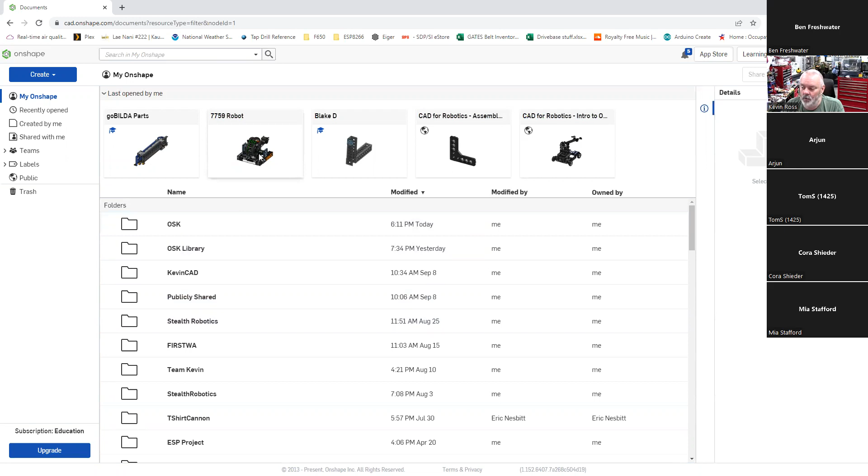I'm going to open up a robot. This is a robot that my team built a couple of years ago, and it's just a nice little robot to show you what is going on. Oh, and I guess I left it in a weird state, so let me load the actual robot.

The loveliness of this particular robot is that we built this—we started in September, did a full CAD model, and it took months because everybody was new to CAD and new to building things. But this was done in 2020, 2021, the year of COVID, so we couldn't meet in person. This was a great way for us all to learn how to do CAD, and my entire team got really good at CADing stuff. So this CAD model is very complete.

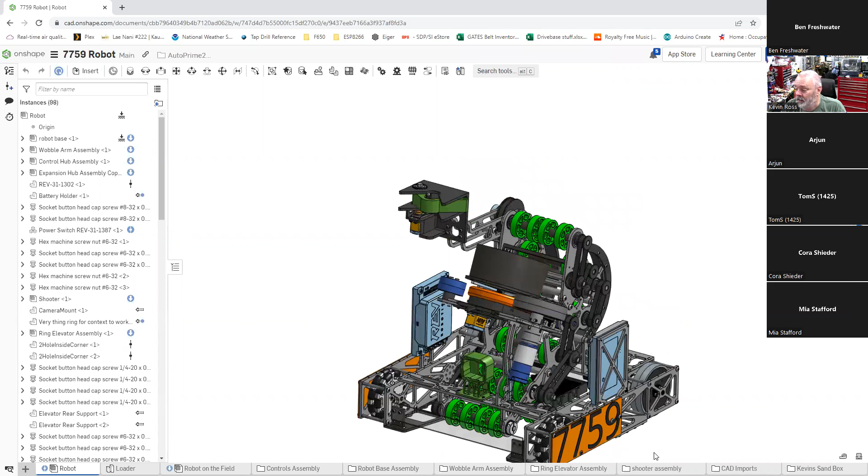It is. I can grab this arm and move it, right? So it operates, it's fully functional. The wheels can be turned and mechanisms can be exercised and moved up and down.

The nice thing is that as we were designing this robot, we were able to put it together and assemble it virtually because we couldn't meet in person. We started this project in September, but weren't allowed to meet until April 2nd of 2021, when the school district said we could meet with students. Everybody came to my house on April 2nd, and we had this robot assembled and working by April 4th, two days later. We got it programmed on April 5th, and we actually competed with it on April 6th, and it did quite nicely.

The beauty of having worked all this stuff out in CAD is all the measurements worked, all the dimensions worked. If I zoom in here, you can see it has 3D printed parts, machined parts done on a CNC machine, and purchased parts like these wheels and compliant wheels. The entire assembly was test fit and tried in advance, so we were able to manufacture this thing very quickly, and it worked out super well.

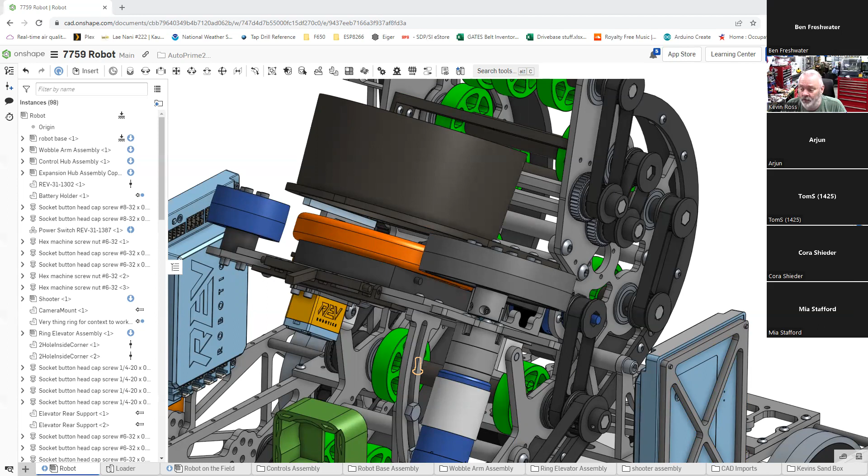So highly recommend this as a good set of skills for your team to develop. The salient points are, even if you're starting with a kit, if you ever plan on 3D printing any parts, having a good CAD model will allow you to make those parts and make them fit. So the key to good CAD stuff is trying to be as accurate and complete as you can.

So I'm going to rotate this part by holding down the right mouse button, and then pan it up a little bit by clicking the center wheel mouse button and moving it up. I'm just explaining that those mouse controls are important. You'll be running this program in a few minutes, so you'll get to try all that stuff.

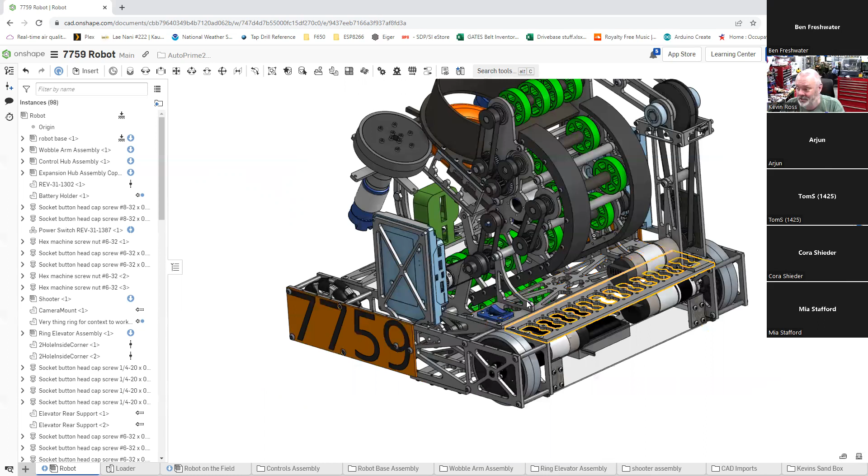My cardinal rule is that you must put in all of the screws and fasteners. You can see all the screws are in these parts. It's the single most important thing you can do with a CAD program, because oftentimes you'll find the tolerance between things needs to be careful, because otherwise this screw could be hitting this plate. It isn't in this model, but it actually was when we first started.

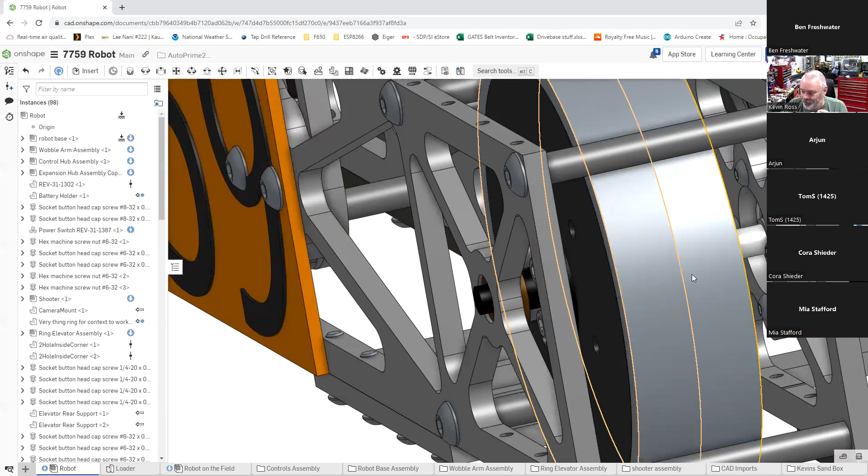You'll find there are places you have to take into consideration, like can I get at the screw? For example, this motor back here is actually assembled with a screw that's hiding behind this wheel. So this gave us the opportunity to make a design decision: in order to take the motor off, we have to take the whole rest of the robot apart. You get to find out things like that, and the biggest issues are when screws interfere with parts moving or sliding.

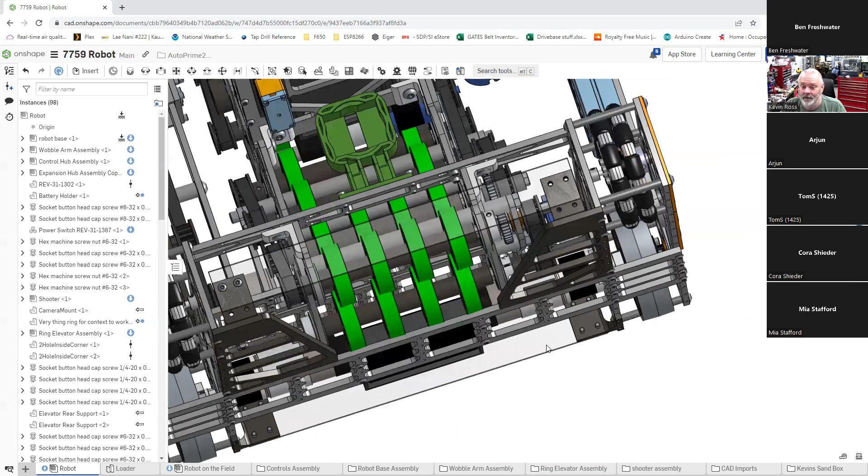Anyway, this is a really, really well done CAD model for a FIRST team. I've been doing this a long time, and this one's 100% complete. It has a black top hat thing instead, but everything is there - all of the screws, all of the parts. If we need to remanufacture something, it's easy - we just download the part and 3D print it or have it milled.

So that's the goal for you, to be able to come up with a good representation. The beauty is everybody working on this robot was working from a common plan. We were all building the same robot, and it made it go together and work really well. So that's sort of the gold standard there.

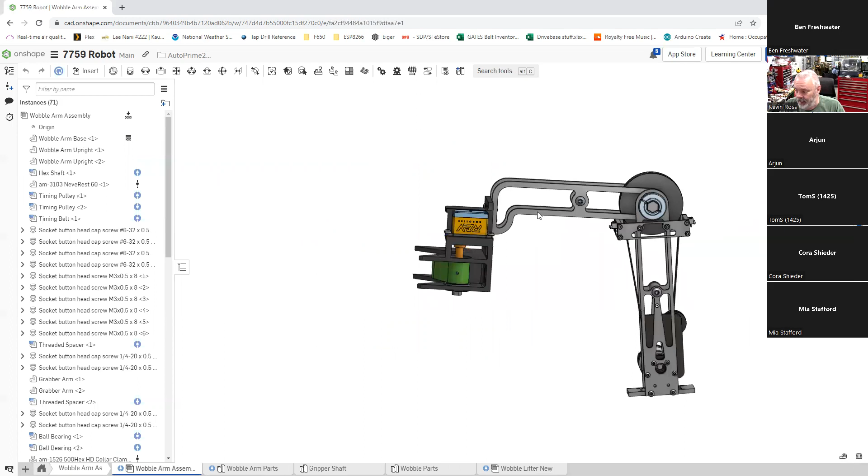Now, you're allowed to break things into sub-assemblies, which is really quite nice. For example, if I go over here and look at the wobble arm assembly, there's the arm that is on there. Again, these parts are all movable, so you can test their fit and stuff. And then we also have the ring elevator.

Where is it? There it is. So the whole thing that actually sucks the rings off the ground and slides them up through this mechanism, right?

We had students working on their submodules independently, and at some point we ended up assembling them all, and everything fits. Because you can try everything, and if something doesn't fit, we can have a little discussion about does the screw need to move, or what do we need to do. So there you go, that's what you're headed for, being able to do this.

Okay, are we good? Thumbs up if we're good. Mia, how'd you do? Were you able to get the account created? Almost, I had to switch to my phone, it was really complicated because the admin won't let me do Zoom on the computer. Roger that, we're working on it. It's all good.

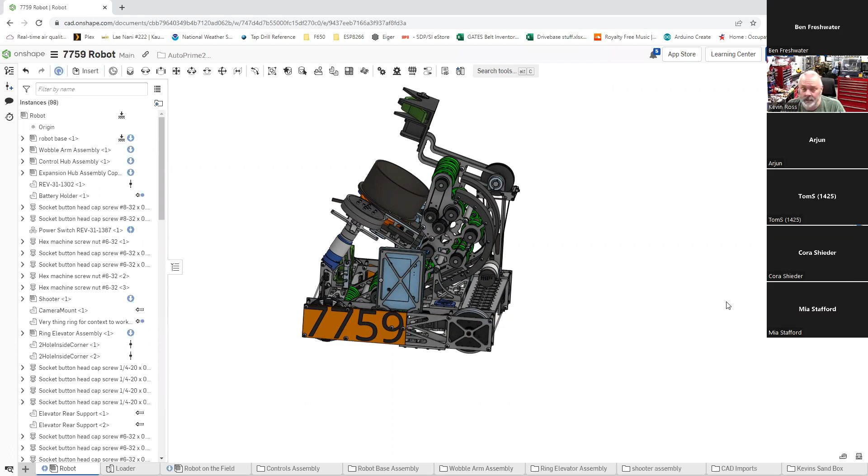Hey, so now what I'm going to do is show you a really cool thing. Somebody on your team, usually a mentor, does this, but I have to do this for all of you anyway.

Hey Mia, let me know when you - well, actually, never mind.

I'll keep going. So under my account, I can come over here and I can see all of the teams that I belong to. Here's all the teams that I belong to. And one of them, I'm the admin of, like this one right here, so I'm the admin of OSK. And here's a bunch of people that are in that, and all these folks were in the class last night.

So now I need to go and find the form. Actually, are you - let's see, hang on a sec, I got to log into this thing, I forgot to do that beforehand.

I apologize about that, I need Office 365, and I'm not going to say my password again. I did that on a meeting once. Yeah, it was only slightly embarrassing. It's all good.

There you go. So what I'm going to do is add all of you nice folks. We had 9 last night, so I should have - there it is, and 9, Blake was last night, so there's all of you guys - Sweet, Cora, Mia, Arjun. All right, good. So I'm just going to add all of you as members.

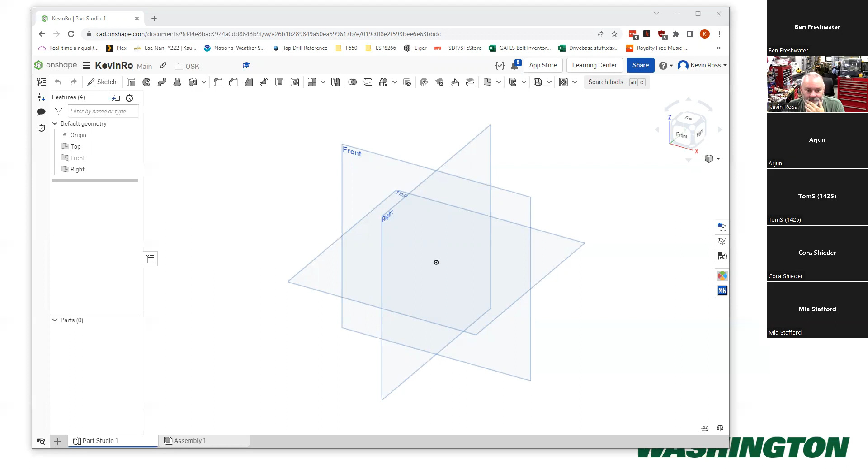Okay, so... all right, so...

What you're looking at here is the main interface to a document. Down at the bottom, there's a thing called a part studio and a thing called an assembly. Part studios are where you do drawing, drafting, and creating of parts. An assembly is where you assemble parts, either from things in your part studio or other documents in your realm, and there's also standard content. So assemble stuff, put it together, make it do stuff. Part studios are where you actually draw stuff. Those are really the two basic things.

I don't want to run off on Mia. Mia, how you doing there, pal? I'm trying to figure stuff out. Nice, I don't know for sure. Did you think you were able to log into Onshape? Yes, I think so. I see an OSK thing, and then Robbie S is there.

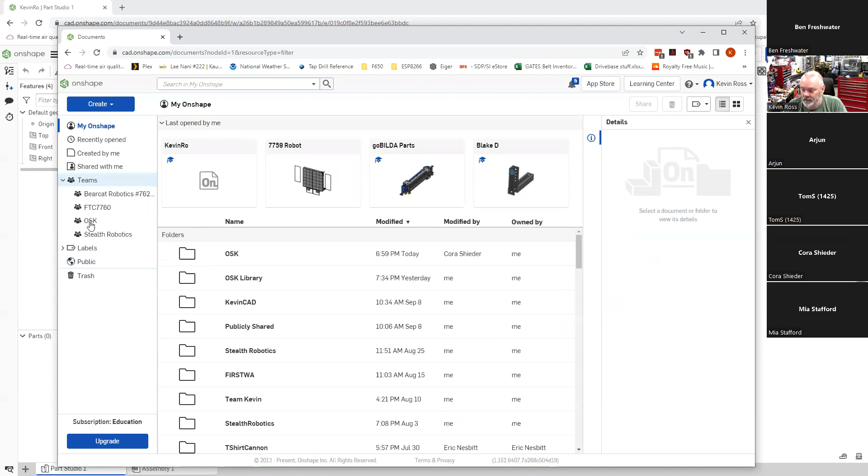Okay, and then I see Cora in the OSK thing, so I think I'm in the right place. So you are looking at, let's see, my Onshape, and if I go to my teams and click on OSK, you're seeing something that looks like this.

Yes. Okay, so I would like you to click on the OSK folder. Now you should have something that looks like this. All right, you're going to do a create document. Create up there, document, and just put in Mia S.

And then it's loading. All right, sounds good. I'll refresh this, and I'm assuming I'm going to see you up at the top. There you are. Okay, 1, 2, 3, 4, 5, 6. All right, everybody's here. I'm liking it.

Again, you can add things to this document. It can hold PDFs, Excel spreadsheets, and all kinds of stuff. There's a plus sign at the bottom that lets you create new part studios and assemblies. We won't deal with variable studios at the moment. You can create drawings and there's a bunch of other stuff the tutorials will teach you about. I'm not going to go too deep into any of that.

We're just going to play around with assemblies and part studios, starting with an assembly. In the part studio, you'll see up top it says sketch and extrude - that's on the top bar, and this all has to do with part studios, the tools used in them.

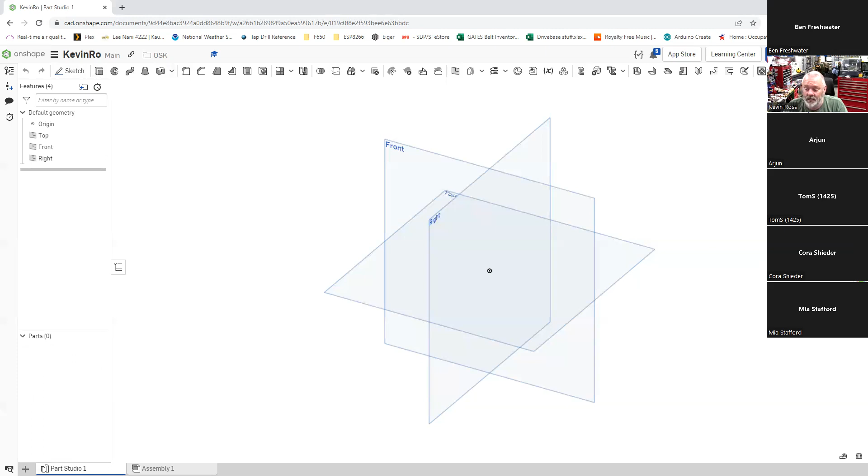Now I'm going to go down to the bottom and click on assembly. Watch that menu bar change up there - now it's got insert, a thing called a mate connector, and a bunch of things for working with assemblies. On the left-hand side, you can see it says instances, with assemblies and mates. Assembly one is this thing you're assembling, and you'll eventually list out a whole bunch of parts over here - a tree of all the parts you're going to do.

So we're going to get started right away and insert some parts. What I'd like you to do is, up in the upper left, find insert and click it. You'll get a little dialogue that looks like that. Go ahead and do that now.

Okay, so you see this little form - it's got current document, other documents, and standard content. Our current document says no part studios are available. Well, we haven't created anything yet, so our part studio is empty, nothing to insert.

What we're going to do though is go to other documents, and you should end up seeing something like this. Some of the stuff at the bottom is unique to my directory structure, but it'll say my Onshape, recently opened, created by me, that sort of thing. And you'll see it has...

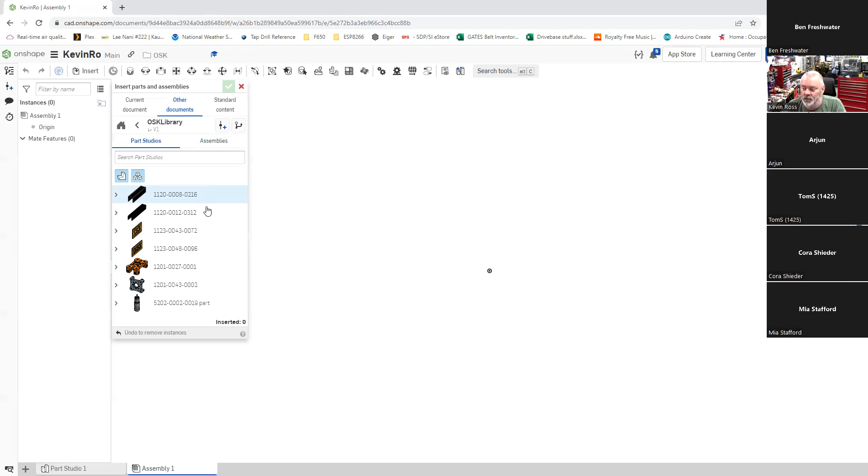So what we're going to do is add a couple of these box beams, these U channels. We're going to click on the one that says 216, like that. You can see that it popped up there, and I'm now using my mouse, and I'm going to set it somewhere and left click it, and that will insert it.

Now if I use my scroll wheel, I can zoom out just a little bit, and now go to the 312 part. We are going to insert one of the 312 parts. I'll put it right there. And then we're going to insert the 048-0096 part. We're going to take one of those and put it over here. So there, we just inserted 3 parts.

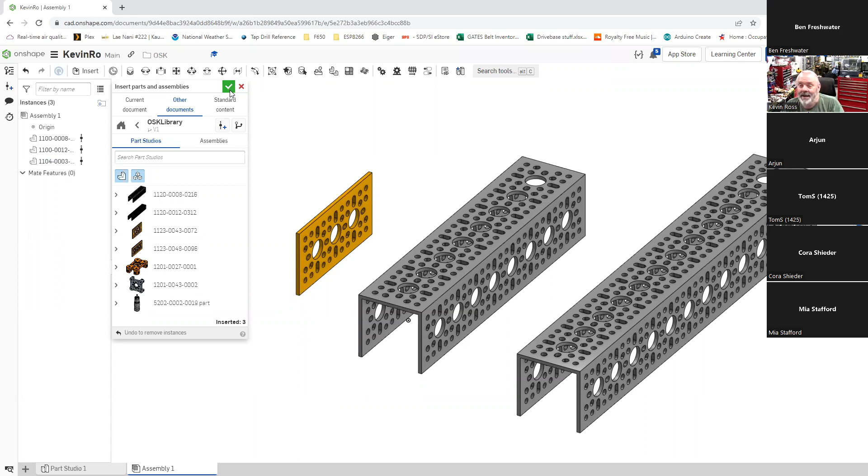Then I hit the green check mark on that thing, and you should have something that looks like this.

Anybody need help? Thumbs up if you're there. Ananya, you have just arrived. You've done some of this before. You might figure out where we're headed. I'm just listening in for now. Okay, sounds good.

Hey, team. So we've inserted our first 3 parts, and now we're going to play around with the mouse a little bit. So what I'd like you to do is, if you hold down your right mouse button and then start moving the mouse, you'll see that you can rotate all of these parts. It's basically rotating your view in space. That's the right mouse button.

Okay, cool, I'm going to let up on it. The center wheel, if I roll it, it will zoom in and it will zoom out. Try that.

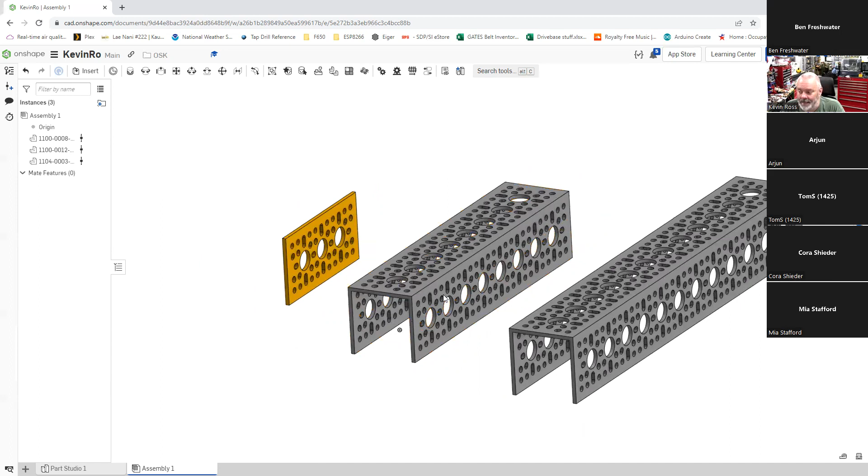If I hold down the scroll wheel and then move the mouse, I can pan everything. It'll keep the same rotation and zoom, but it'll just allow me to move things. So for example, if I was wanting to scroll in up here, I need to move that down a little bit, and I can scroll in like that, and I can move it over.

So that's me pressing that center scroll wheel. You're going to find that you'll get good motor memory on this: right rotates, scroll wheel zooms, holding down the scroll wheel allows you to move things around. Okay, everybody's good with that?

The left mouse button allows you to select things. So I am going to come up to this little plate up here, and I'm going to left click it. Okay, and you can see that fancy little control here, we'll talk about that here in just a sec. But if you look at my mouse, you can see that it has a little number 1 next to the mouse. It tells me I've selected one item.

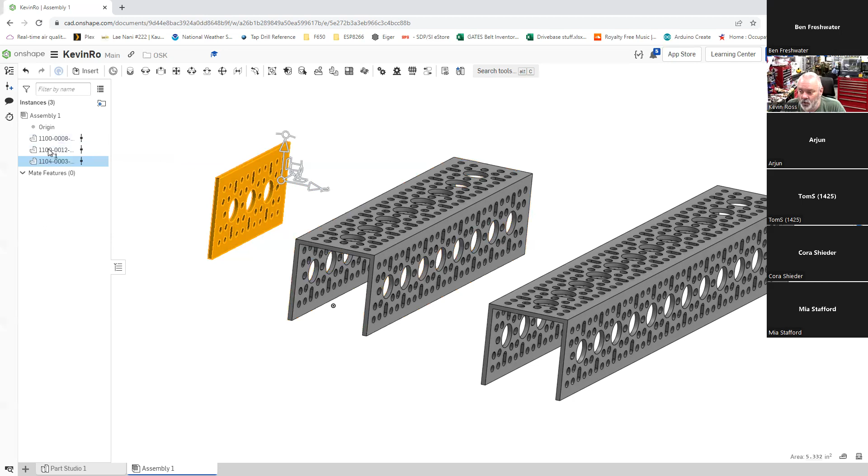Actually, it's highlighted the thing that I've inserted over in the instances tab, because now I'm going to go over here and focus on this left tab over here. You see these are the 3 parts that we've inserted. And it turns out that you can select multiple things over here. So now I've selected all 3 things.

They've all turned gold. If I want to unselect everything, then you go find a nice piece of white real estate on the screen and you just click on nothing, and they should deselect everything. Try that: select 3 things, come over here to white space, then hit the left mouse button and it'll unselect it. Okay, and so that's kind of the main things that you end up doing with the mouse: selecting things.

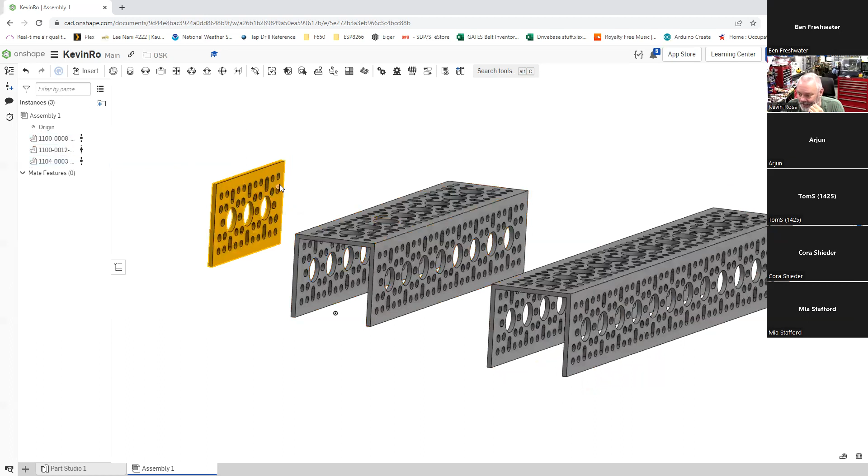Selecting things. There we go. And rotating, panning, zooming. Okay, now sometimes when you select something, you can actually hover over it and click the right mouse button once, and you'll get a context menu.

And these are things that you can do to it. So I'm not holding the mouse button down, I just clicked it once, and I can do this with all of these things.

For example, to make your life a little bit easier, let's have you click on nothing, so you deselect everything. And I want you to click once on the center part, this guy, or the short one. Right click it once, just click and let go, and click the fix word.

What fix is going to do is it's going to tell the program, don't let this part move for now. We can unfix it later. And you can see up here in the instances, it got a fixed label on it.

So what we're going to do, what I'd like to do is take this big part here and form an L shape, like we're building a robot base. One of the things I can do, you can see I've unclicked everything. I've clicked just on the long one, and we're going to mess around with this position control over here, where you can see the axes. I'm sorry, it doesn't let me zoom in on that.

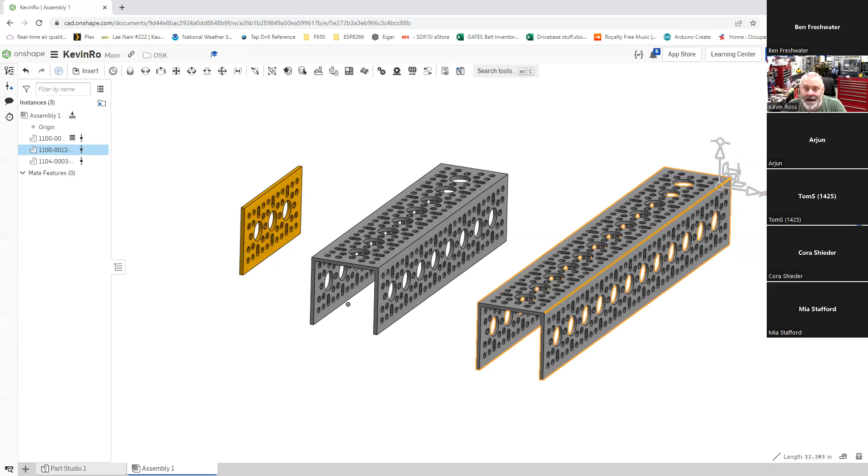Well, maybe if I hit Control plus, does it get bigger? It kind of gets bigger. That's a little bigger. It might be getting a little fuzzy because I over-zoomed my screen. You can see I have the ability to grab this arrow and I can slide the part, or offset the part, just in that direction.

I can select this guy, do the same thing in another direction. I can select this guy and grab that arrow and do it in that direction. And it's showing you how far I've moved it, and it's not really useful for us right now, the actual dimension. The other thing you can do is highlight this thing and grab one of the square boxes, and that will allow me to move it almost anywhere.

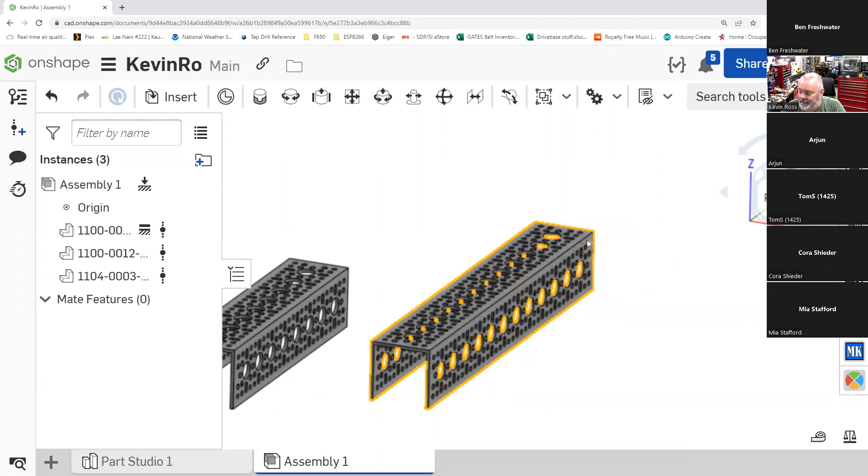So go ahead and try that. Try moving that thing around by just selecting it, and try dragging it around just a little bit. You don't need to drag it too far.

Okay, hopefully everybody got to do that. Another thing that exists is this viewing cube, and this will allow you to select views. There are three planes: top, front, and right, and those are standard planes. There's also left, back, and bottom. And it turns out if I turn this guy, keep going, you can see there's back, there's bottom. So it's a cube, and I can actually select planar views, views that line up with that, by just clicking that cube.

So there's a top view, and I can get the back view. I can turn it this way and get the left view. I'm using this thing to sort of click it, the front view, right? So what I really want is actually the top view. And so there's the top, so there I've got a top view. See if you can get a top view. Hopefully you can. Okay.

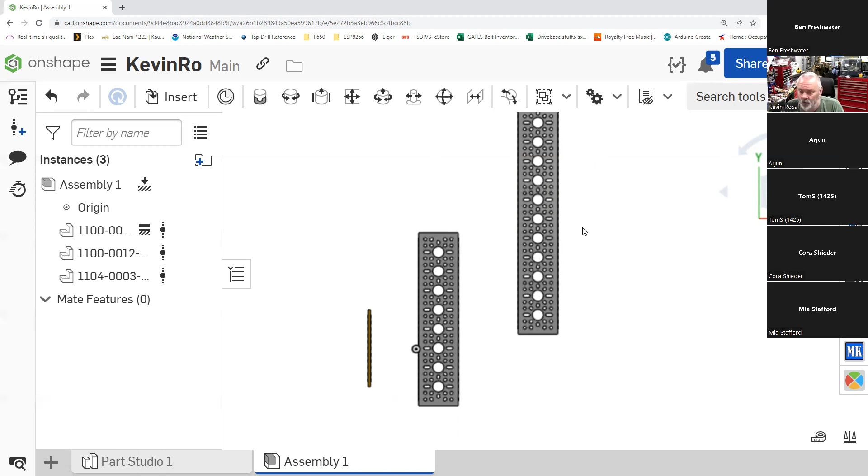And what I'm going to do is click off and unselect everything, and we're going to click on the big long part and see it gave us that movement control. This arc out here allows me to rotate things, and it'll tell me how far I'm rotating it. I want to rotate that guy 90 degrees.

And I've done that, and then I'm going to left click out in the middle and left click out in the middle, and there it rotated that part 90 degrees. And that's going to help me position my part. Try that. Everybody good? Everybody got that? Thumbs up on your reactions if you can.

How you doing, Cora? You got it? Yeah, I got it. My Zoom thing just went on full screen.

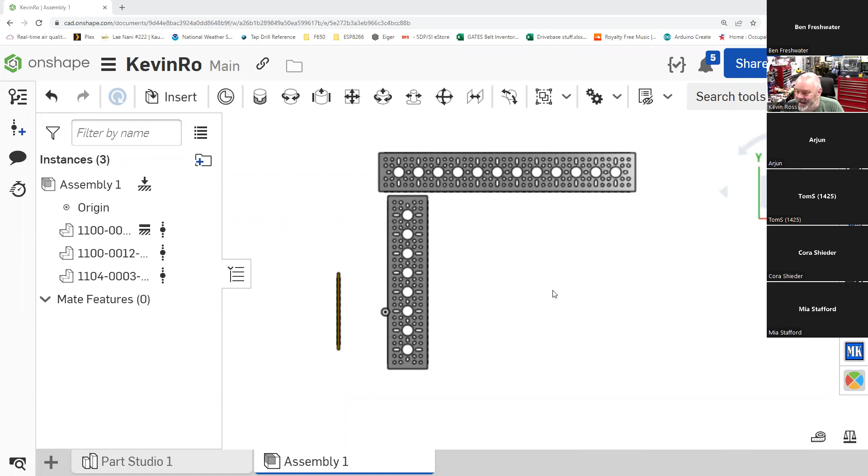No worries. Okay, so now I'm going to right click a little bit and see, I've unselected everything. I'm going to select just this plate over here, and I would like to rotate it. So I'm dragging with my right mouse button, even though that thing is there, and I would like to rotate around this axis 90 degrees.

Okay, and then I'm going to unselect everything. So there it stayed rotated, right? I'm going to look at it from the front, and I'm actually going to move this plate. I can just grab this plate and drag it up kind of like that. Try that.

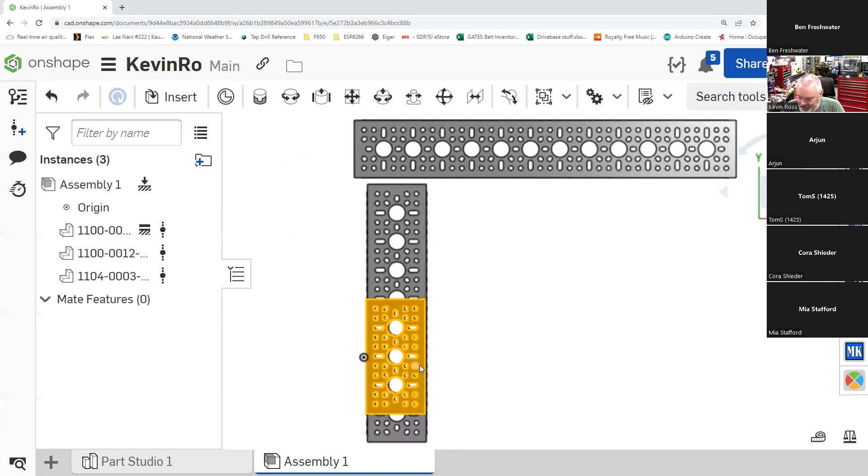All right, I'm going to roll it a bit and look at it from the top, and just take this part and drag it up here. You do this a lot as you're trying to get everything pre-positioned.

We're actually going to attach this plate to the bottom part down here, and then we're also going to attach it up here. So you can see that—that's me just rotating things around.

How are we doing? Everybody good? Thumbs up if you're good. Got something that sort of looks like this? All right.

Now what we want to do is assemble this thing, and so there are these assembly mates. In assembly, there's a bunch of mates up here, and they start from fastened mate, and they have a revolute mate and stuff.

If you just hover over one of these and let it sit for a second, it'll bring up and try to tell you what it's going to do. You can do a revolute mate, which fixes the two parts together and allows it to rotate around the z-axis.

If I look over here at the axes, the z-axis is the blue one. So if I rotate this a little bit, it'll allow this part to rotate around that axis. You'll see this in just a sec. There's a bunch of them up here, and you'll get to know these real well.

So what we're going to do is actually do a revolute mate. This mate here—I'm going to click that, and it'll bring up this little dialog box. All of the dialog boxes in Onshape put up a little blue thing, that's what you're currently filling in. So it's asking for connectors.

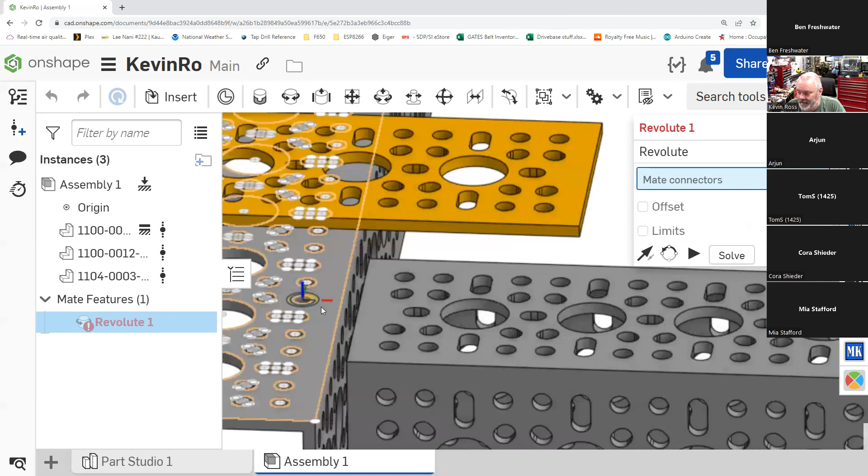So we're going to end up connecting this hole here. We want to connect this hole to this hole, okay?

So what I'm going to do is start by coming down here, and as I hover over this plate, you can see all of those little pucks, we'll call them. They're actually little connector indicators, and there's tons of them on here. You usually find them at corners, at vertices.

You oftentimes find them at midpoints. So there's a line here that forms that edge, and there's a midpoint out there. So there's a connector, and there's connectors here—you can see there's tons of them.

What I'm looking for is I'd like to connect this hole right here, okay? So as I hover over this and get close to this circle, you can see it's added a mate connector. It's inferring where we want it to be.

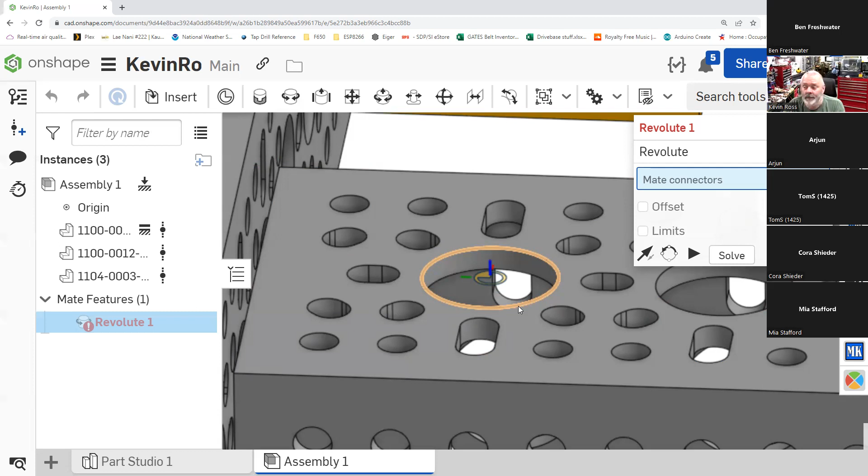If I'm hovering just over the edge of the circle, it's selected the center, and you can see the z-axis is pointing up—that's actually what we want. So if it looks like this, I can just click that, and you can see it added a mate connector on this part, and that's the connector we're using right there.

Everybody got that? I'm now going to zoom out a little bit, press my right mouse button and roll this thing so I have access to the bottom of this guy. I can zoom in a little bit, and you can see it's allowing me to select.

If I hover just over that circle, it's got another connector with the z-axis going the other way, which means that it's a mating connector.

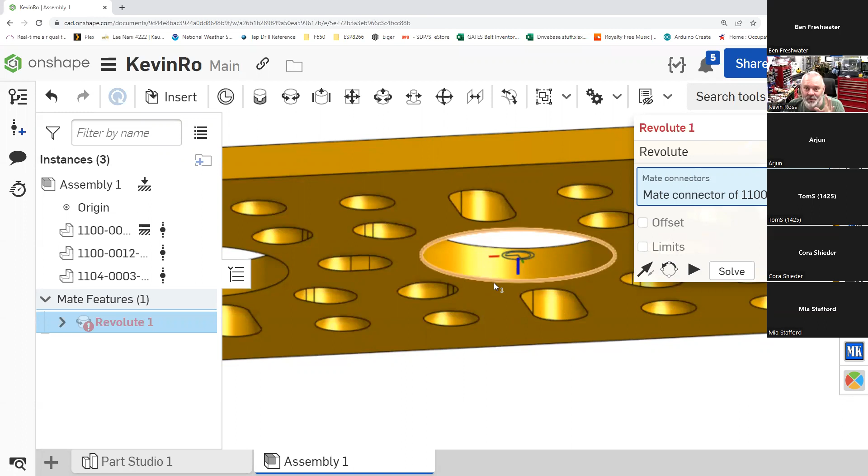Now, if you're having trouble actually getting that one thing, here's a trick for you. It turns out that almost all mates have three incarnations, especially when they're cylinders like this. I'm going to rotate mine just a little bit more so it's obvious.

If I hover over this, you can see that three mates have appeared—there's one, two, and three. See those three? They're all related to that same hole. So I could mate at the bottom of the hole, the middle of the hole, or the top of the hole, and there are useful reasons for doing that. Now, so what I did to make that happen is I hovered over the plate and got close, right?

I can hold down the shift key while hovering over the side of the hole, and it'll limit selection to just mates associated with that hole. If I lift up on it, that allows you to navigate around and find stuff.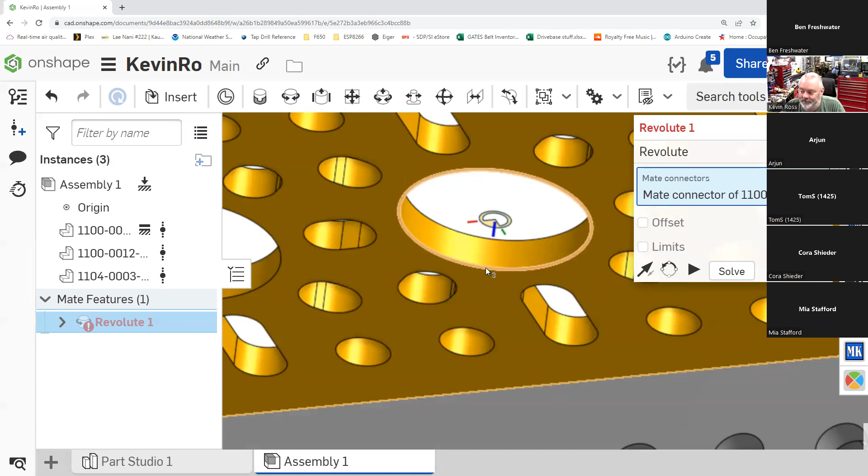So what we want is to highlight that mate right there. I'm going to click it, and my thing disappeared. Let me scroll out a little bit and rotate back up—you can see it moved the part into position for us, which is kind of what we want. I can hit the solve button, and it will position things where I wanted. Then I hit the green check mark, and now I have that mated connector.

You can see over here it says Revolute 1 is happy. Does everybody have a happy Revolute 1? Who needs help? Usually this doesn't go well for at least one person.

I have, like, when I revolved it, it went inside of the short piece and the long piece—it went all the way down into them. So you're telling me you have something that looks a little bit like this?

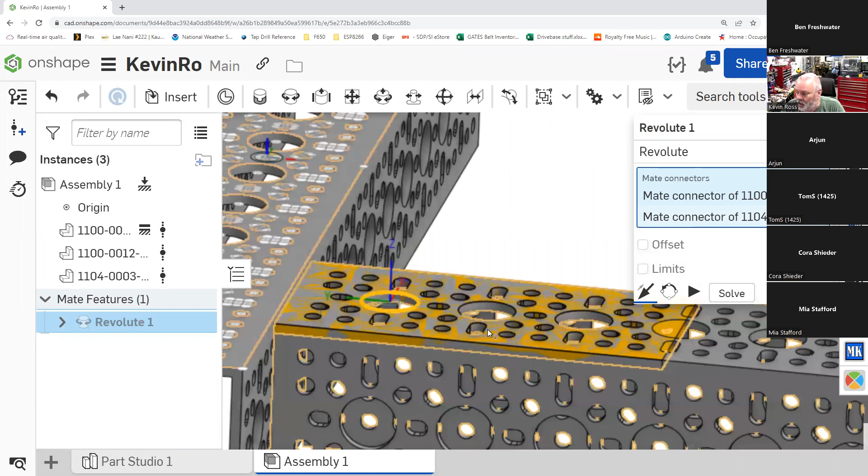Yes. Okay, so sometimes that happens. When it does, you can double click on that mate to reopen it and try hitting the flip primary axis button. That'll flip the axis, and usually that'll cause the part to go back up on top. Try that—did that work? Yes, it did. That's one of those things you get used to. Usually when something has buried itself into another part, you need to flip the axis. It's super common, no worries.

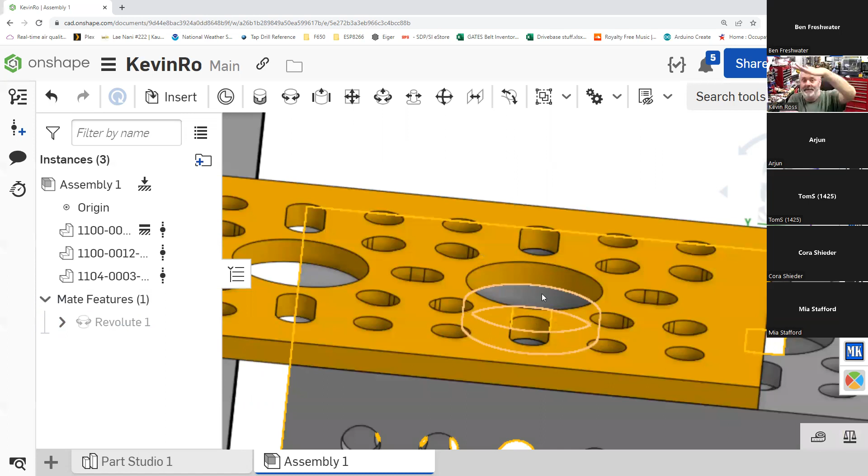So there you go—hit the green check mark, and you should have something that looks kind of like that. We just did a Revolute mate. That means it has taken the two pucks, those two mate connectors, and connected them together, but they will still revolve.

If I grab this plate—by the way, make sure the first part we inserted has the little fixed mark. If it doesn't, click on it, right click, and make sure it says fix. That little icon should be there. Then you'll find you can actually rotate this part because it's a Revolute mate.

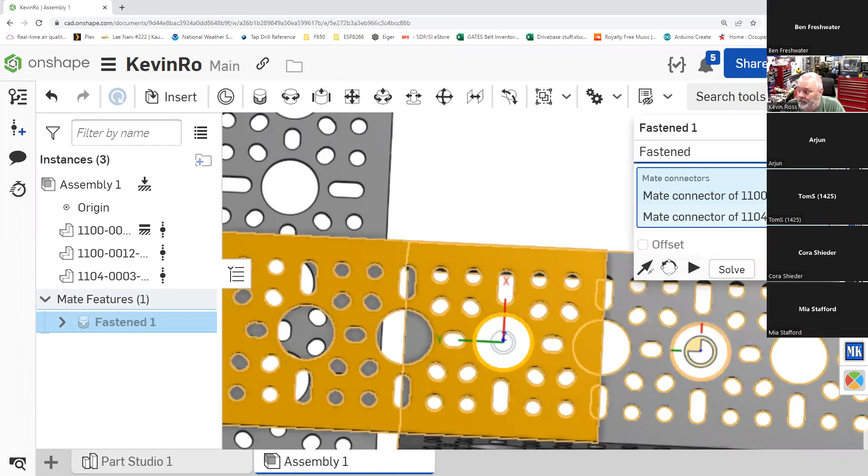Now you have some options here. If you want, you can decide that it all lined up really nicely, so I could edit this revolute mate and change the type of mate it is—there's a drop down here—and do a fastened mate instead. I'm going to do that, and I suggest you do it as well. Change your number one mate to fastened and hit OK.

Now you'll find that you are unable to move this thing. I can grab it and it won't move. It's fastened, it's fixed. Yay.

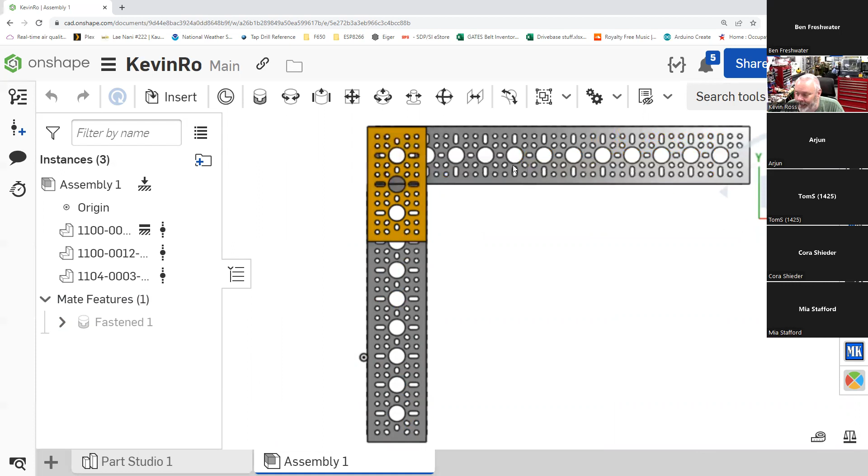Now what we want to do is get this part ideally lined up nice and perfect with that, right? So in theory we could do another fastened mate—pick this guy and the underside of this guy. All right, I want that one.

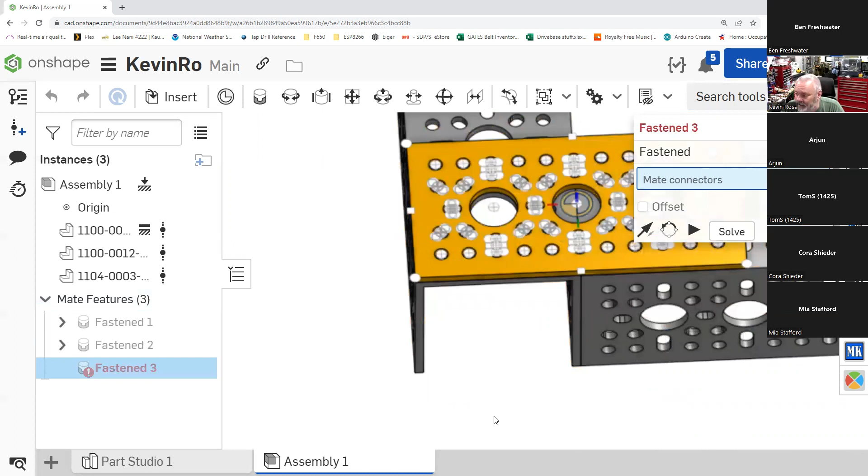I'm going to rotate this up, and you can see that if I hit the solve button, it will make sure everything moves into position. It looks right—all the holes are lining up. I should be able to hit the green check mark, and now I have a second fastened mate. I'm going to close that because I'm done with fastens at the moment.

So you can see we just did our first assembly. You have half a robot base going here—not bad. These are the sorts of skills you're going to get really good at when you do these tutorials, but I just wanted to give you a sense of what it is you're going to be learning when you do all this tutorial stuff.

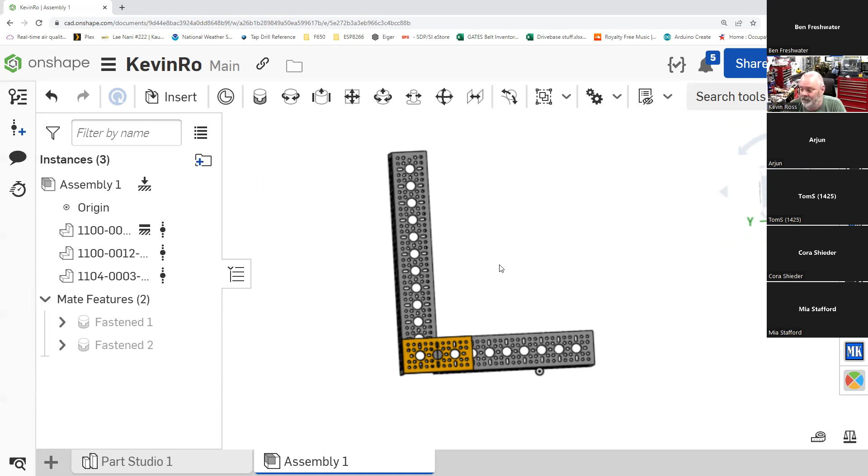So these are now fastened, they don't move. We're going to try inserting a couple more things. Wouldn't it be nice to actually bolt this together? This has a ton of bolt holes, but I think if we were to put like 4 screws, one here and here at the end, and one here and here, that would probably hold it quite nicely. Actually, we're going to put screws on this side as well, so we're about to insert 8 screws. I'm going to unzoom a little bit so it looks cleaner. There we go. All right, we're going to do another insert.

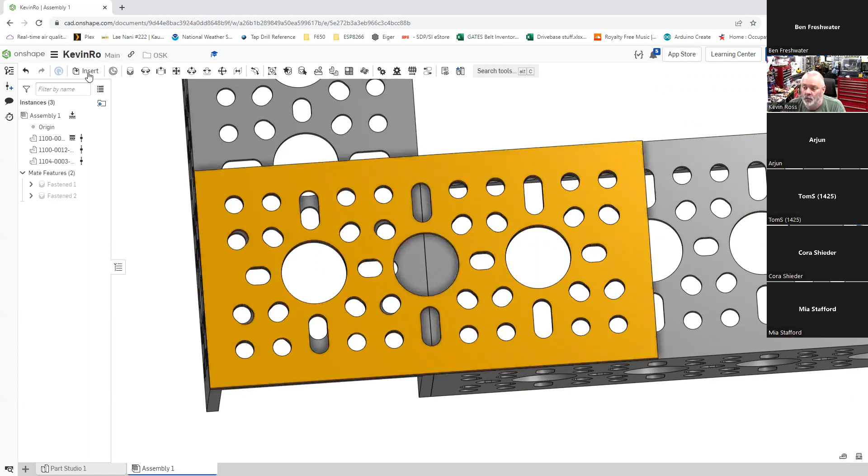Everybody's looking good. All right, so we're going to do an insert, and instead of other documents, we're going to go to something called shared content and standard content. This is where you find nuts and bolts and screws. They have a very limited set of things. This is a little form that you fill out, and it's going to remember stuff. It's smart and tries to remember what it is that you use commonly. But we're going to start at the top, so you kind of fill this form out from the top to the bottom.

So we can either use ANSI inch—like this is a 1/4 inch bolt—but turns out that the parts we're using are actually metric, so we're going to select ISO, International Standards Organization, which is equivalent to saying metric. We can select bolts and screws, nuts, and a bunch of other stuff. We're going to go with bolts and screws for now. We would like to use what are called socket head screws. And we can actually select socket head shoulder screw. Oh, I apologize, hex socket head cap screw is what I meant to say. There we go, hex socket head cap screw.

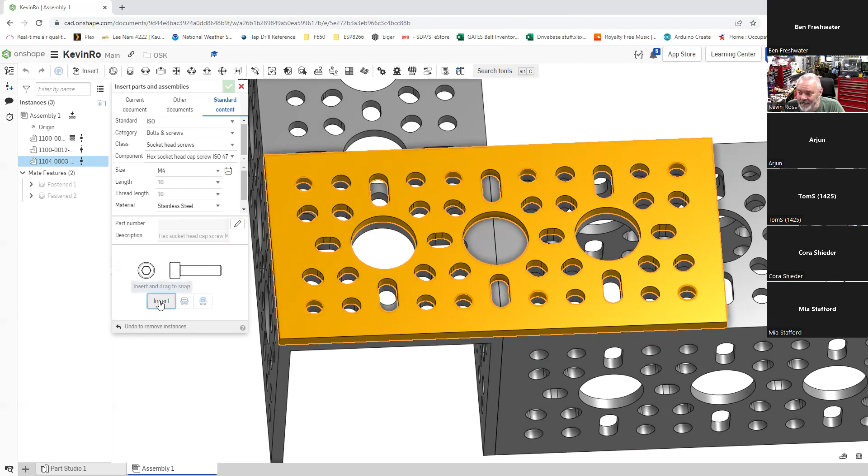And I'm actually going to do this hole, and I'm going to do the 4 outer holes again, and suddenly I've got 5+, all right? So I've selected all those holes, and all I have to do is hit insert, and it is going to drop all of those screws, and it's automatically mating them to those holes. It's super slick, it makes me happy, I tear up a little every time I do this. The other programs make you do each one individually.

All right, so if I roll this under—I'm using my right mouse button still—I can see that the screws are sticking through. You'll notice they didn't put the threads on here. It turns out that the way Onshape works, threads are very computationally intense and they really slow things down, so they tend not to use the threads.

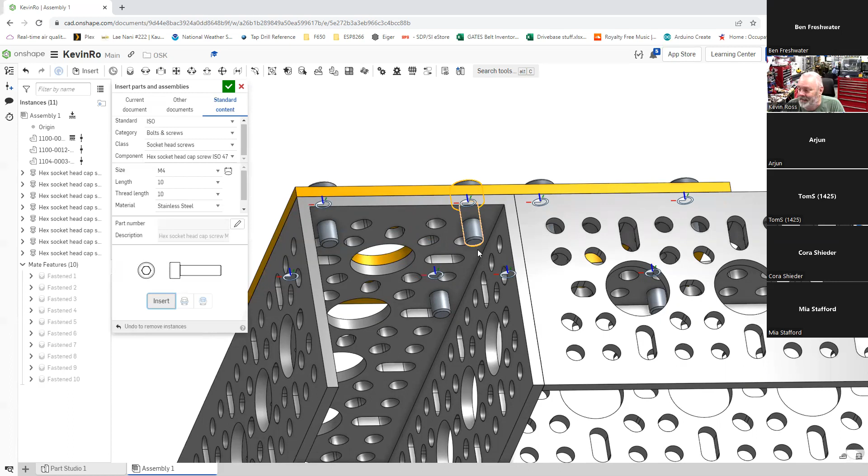It's fine. So now what we're going to do is, well, we need nuts on this side, don't we? So I can go back over to ISO and say nuts. We could use hex nuts, but we're actually going to use prevailing torque hex nuts. Their shape is very similar to what's called a nylock, so we're going to go with it. Then you're going to use the component, which is a prevailing torque thin nut. All right, I'm going to pause there for a sec so everybody can catch up.

Once again, we're going to select all of the places that we want nuts. Where we actually want the nut is for it to adjoin the hole, not the screw, because that's where the screw goes through and tightens down. So I'm going to come to the bottom side, select that circle, come over here and select that circle, and do that to all of these.

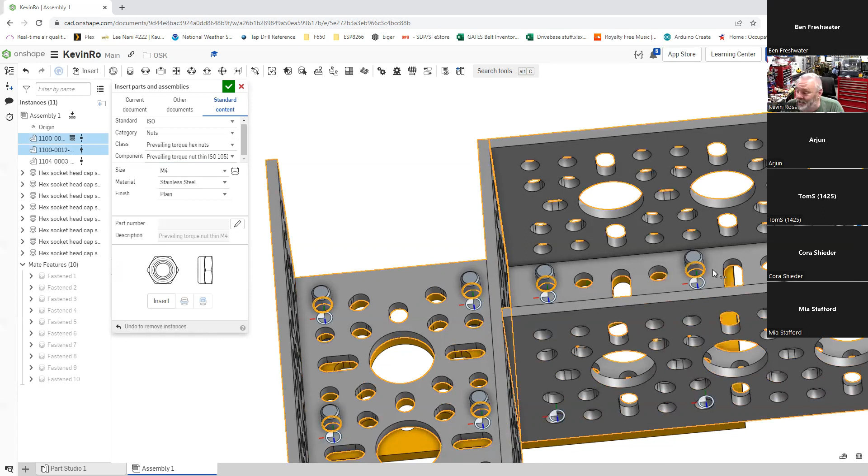And there's those two. Again, you end up using that right mouse button a lot, because you can just hold it down and scroll things around so you can get access to it.

All right, so I went and selected all the places where those guys line up, and then I'm going to hit the insert button, and I'll get all of my lock nuts.

Lovely. Best thing ever.

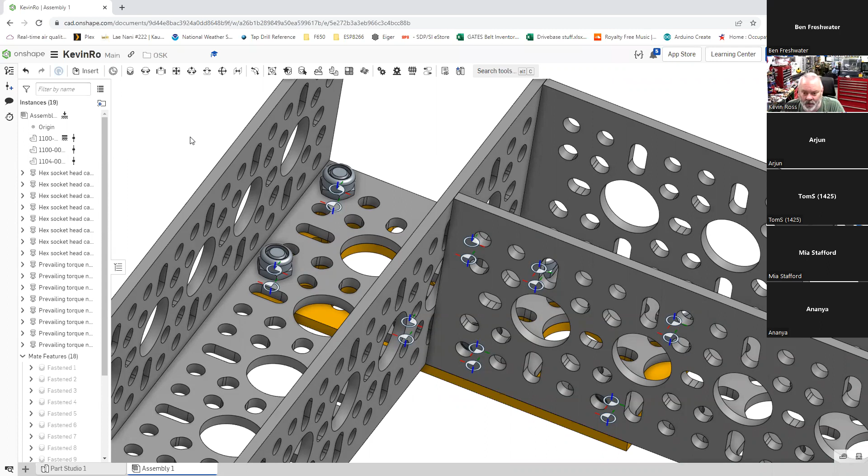Is it okay if I just kind of follow along? Because I can't really watch and do at the same time, so I'll just kind of get a feel. Okay, sounds great. I'll be showing you the tutorials you're going to do, we'll end up going through all this again, I just wanted to give you a feel for what it looked like. Whoops, we lost Cora. Oh, that's all right, she told me she was going to have to leave early, she has to go feed animals.

All right, hey team, we just assembled something. If we scroll out, there it is, that's like half a robot base. That's what it's like to assemble stuff. And it turns out these are all parts out of the goBILDA kit, you'll find that you can download parts from most vendors. I'll show you that in just a sec.

Okay, we're going to just, okay, hopefully everybody is there, and I'm going to show you one other trick, which is up here next to your file name is a little menu thing. If you click down on that, you can set a whole bunch of things like the document properties, there's a bunch of stuff you can do. One of them, though, the important one, is workspace units. If you click on that, this would allow you to change from inches to millimeters, and you can just swap back and forth depending on what you're doing. It turns out that the parts we're using here are metric, so I've just switched this over to millimeters for now. Go ahead and do that and hit the green check mark.

So it was the document menu, workspace units, select millimeters. Okay, thumbs up when you're done. Good.

Tom's got it, Ben's got it. How you doing, Arjun?

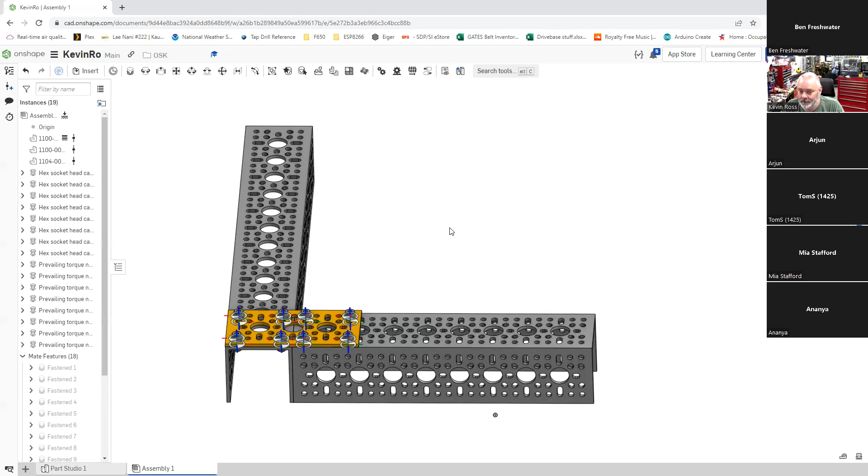All right, so I'm thinking, hey, let's go measure a few things down here. We're going to build a little plate that's going to attach right here, and so we'll go one, two, three, four, so we're gonna do those.

So what I'd like to do is, well first of all, I can scroll in on this thing. So I've scrolled way in, and I can actually come with nothing selected, I can come select this hole. And one of the things you might notice is down here in the far right-hand corner, it's telling me what the diameter of that hole is. That's pretty useful. And actually there's a little measuring tape thing here, and you can turn that on and it'll show you what it measured. It measured diameter and it's telling you the coordinates of it. Ooh, that might be interesting.

The other thing I can do is, I've got that one selected, I can come over here and see that the measurement changed. It's telling me the distance, and there it is, center distance, and it's highlighting that line right there. So those two holes are 32 millimeters apart. Okay, and I think I should be able to click off this. Okay, so I unselected everything. I'm going to click this hole and the hole up here at the top, and it's also 32 millimeters. So it's a 32 millimeter square.

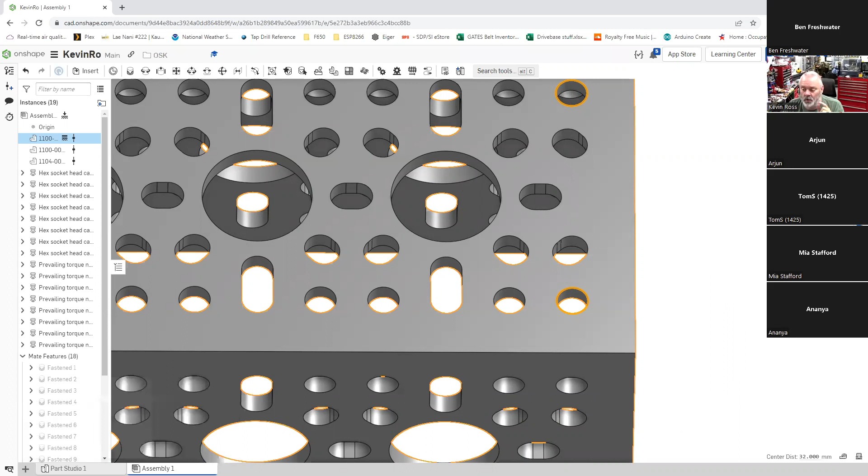Go team, we're going to go make a part. So I'll close this little measuring thing, and I'm going to come over here to Part Studio 1. So I'm going to click off the assembly and we're going to go to Part Studio, and it'll end up looking like this. Okay.

And we're going to start a sketch. So I'm going to draw a sketch, and I'm just going to click on sketch up here. It's underneath the file name. And if you check, it's asking you to please select a sketch plane.

There are 3 defined planes when you first start a sketch: top, front, and right. So there's sort of the 3 dimensions here, you can see them there. And we'd like to use the top plane, so I could click on top here, or click on top over here. Here are the planes, by the way. I'll just click on top over here, and you can see it, the sketch plane is now the top plane.

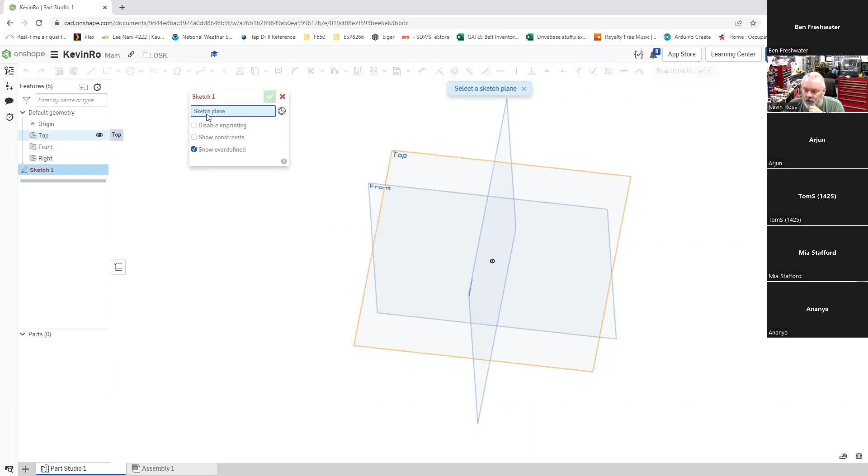That's handy. And if I want to look at it in plan view, I can go over to our orientation cube and click on top. And now I'm looking straight down on it like it's a piece of paper. Okay, awesome. You'll notice that the menu bar up here has changed.

There's some drawing stuff. I can draw lines, rectangles, circles, and you can go right down the list. There's a bunch of other stuff. We're going to touch on a little bit of all of these.

Okay, we're going to draw a rectangle, but a center point rectangle. This one is currently called a corner point rectangle, but if I click on the down arrow, you can see there are other rectangles we can draw. We're going to do a center point rectangle, so you should get that little icon right there.

Now I'm going to go over and see the dot in the middle of this thing. That is the origin, and I'm going to use that as my starting point. So when it highlights, I'm going to click it once with the left mouse button, and then move this out. You don't have to drag, I don't think, you might be able to, but I didn't. I'll come out here, and then click one more time. So I left clicked once, and you can see now there's a number down below, 50.523.

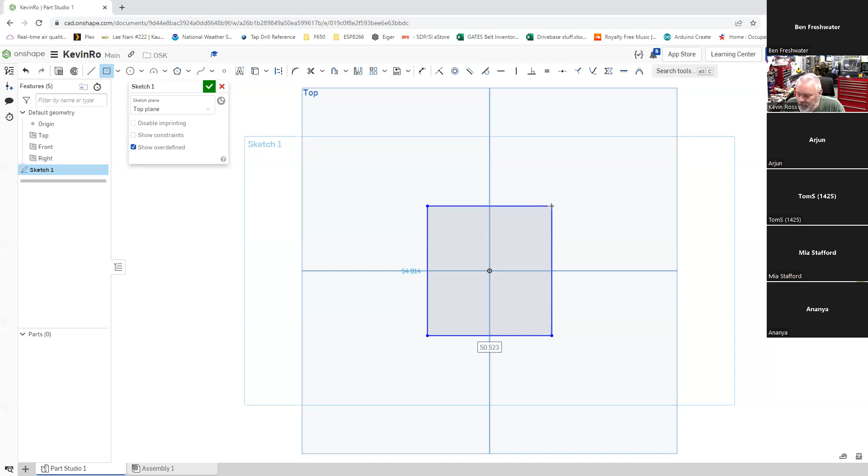That's asking me for a dimension. So I can type in, I'm going to put a 40 in there. And that defined that one dimension. Now it's moved to the other dimension, so I can put a 40 in there as well.

Now, I oftentimes screw that up. I'll hit enter or something and only get one dimension, or forget to do both of them. So if you missed a dimension, there's a dimension tool, it's kind of in the middle, up here at the top. You can hit D for it if you want, and that'll do it as well. You can come up here and turn that guy blue, then come down here and redimension this guy. You can type in some number, and if I decide I want to change it, I can just come to that number, double click it, and change it back. So there we go, 40 millimeters.

Well, now I know I want a hole because we want to bolt this thing to something. So I'm going to come up here and grab myself a center point circle, come down here, sort of out here in the middle somewhere, click once and make it bigger, something like that. And then I'm going to tell it I want it to be 4 millimeters. That wasn't so bad. Cool.

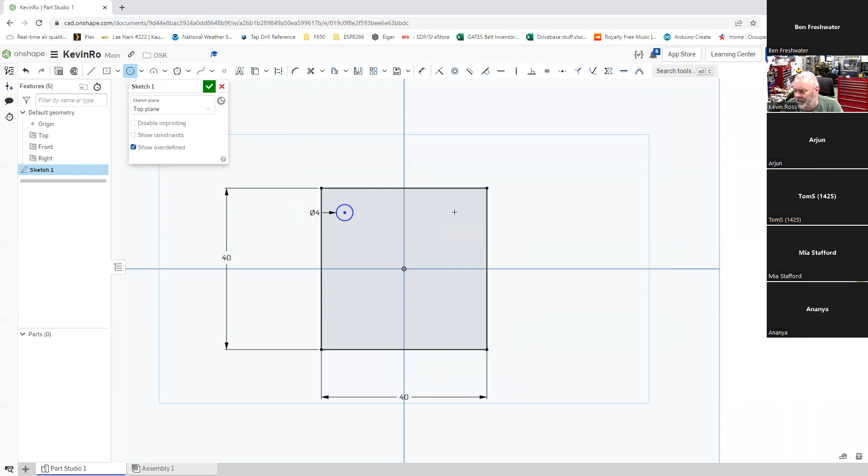Hey, I would now like to draw another circle, and it's still in circle mode. So I'm going to come over to the right side here, draw another circle, and I think I want it to be 4 millimeters again. Cool. All right, so that's one way I can draw a circle. And I'm going to turn circle mode off by just clicking on it one more time, so now we got nothing. And so I've got these circles here, but you'll notice they can be moved around because I didn't tell them exactly where it's going to be.

We have to give some parameters or dimensions in order to do that, something called a constraint. So we're going to start with some constraints. There's a set of constraints, and that's these guys over here.

There's coincident, concentric, parallel, tangent, and horizontal. We're going to start with a horizontal constraint. I'm going to click on horizontal constraint—that's that horizontal line right there. And I'm going to tell the program I'd like the center of this circle, so I'll click on the center point to be horizontal with the center of this one. Now they will always stay horizontal to each other, always having the same Y dimension. That works nicely.

Now I'd actually like to define the dimension, because we measured earlier. I'm going to do another dimension, telling it that from this hole to this hole right here, we wanted that to be 32 millimeters, because that's how far apart the holes were on our part. That works nicely.

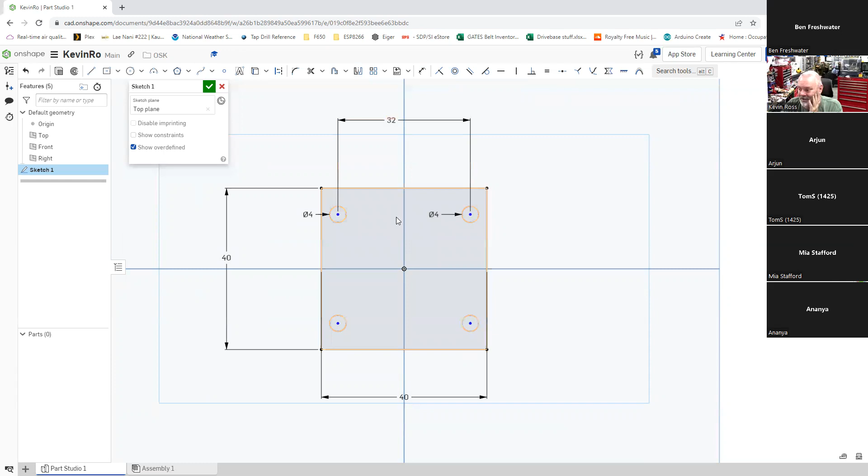Now if I take these guys and move them, you can see they're just mirrored across that line. But I can't move them left and right because they have to be 32 millimeters apart and symmetric across this. Good? Is everybody with me? Thumbs up if you got that.

All right, sweet. So now I want to define a dimension between that circle and the center of this circle. I'll come out here and tell it that should be 32 millimeters. Notice what happens when I type that number in and hit enter—you'll see all of these things went from blue to black.

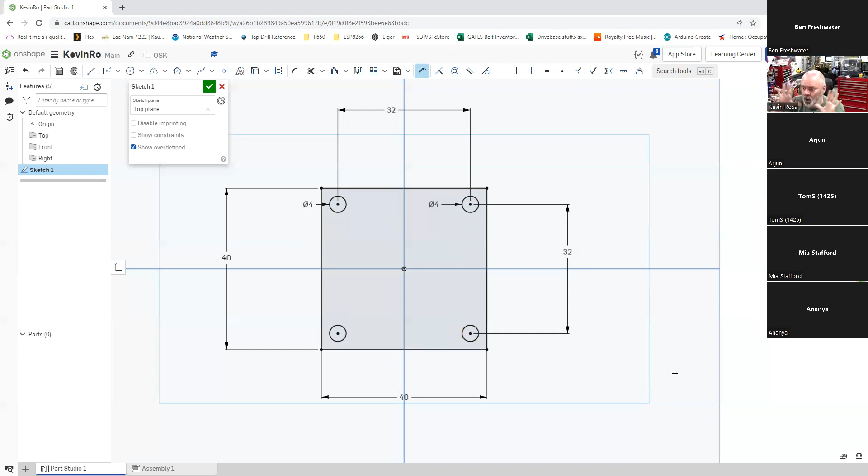That's something called fully constrained, meaning those holes can no longer move willy-nilly. They are fixed now. I can still change things—I can come down here and change this dimension to say 16 millimeters, so they can still be moved, but they won't move by themselves. You have to intentionally change a dimension for them to move.

So there we go, there is our sketch. If you have this and life is good, then we're going to hit the green check mark, and you'll end up with a sketch. Here it is over here, and that's what the sketch looks like.

And if I use my right mouse button and roll it, you can see it's just a two-dimensional sketch. Now we're gonna make it thick.

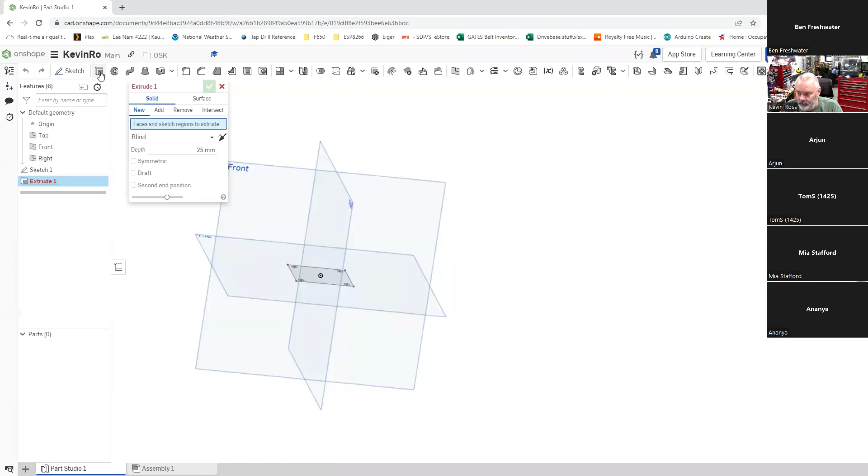So to make it thick, we do something called extruding. Up here next to sketch is the extrude button, so I'm going to hit that. It's asking me for faces and sketch regions to extrude, so I'm going to come down here and click on that. And you can see it got thick.

We don't want it to be that thick. It defaults to 25 millimeters, about 1 inch, and we actually want this thing to be about 4 millimeters. So I'm going to put in 4 mm and it'll get thin on us. Look at that, nice. And I'm going to hit the green check mark.

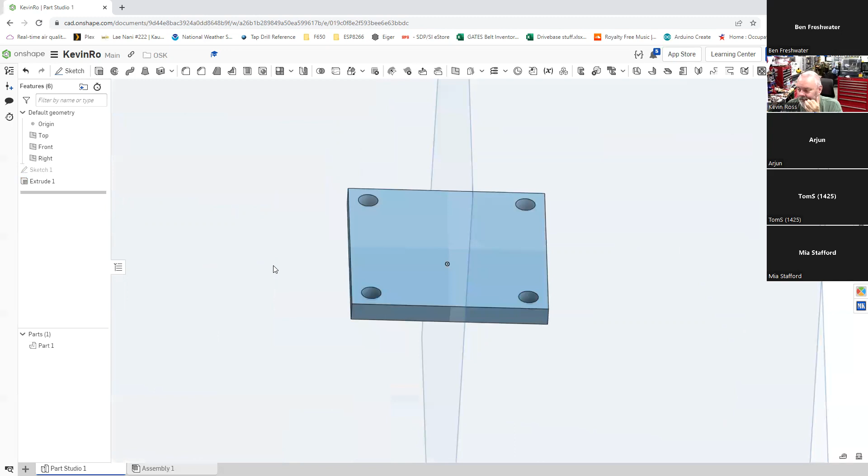Some things, this is awesome. We made us a part, right? And I can rotate it around. Got some mounting holes in it. And you'll notice over here in the features list, once you've done an extrude, a part showed up down here.

And this part we want to be able to name. I've ended up selecting things I didn't intend to select, so I'm going to go over to white space and click on it to stop that. So I'm going to come over here to part 1 and highlight it, and I'm going to right click it and we're going to rename it.

And we're going to call it the cover. Okay, go do that, rename that part. Another thing you can do once you're done renaming it, I right clicked it, did a rename. Okay, I'm going to right click it again and do an assign material.

And there's a bunch of materials down here that you can choose from. A lot of times we just end up typing things in. We're going to use nylon. Why not? Nylon down here.

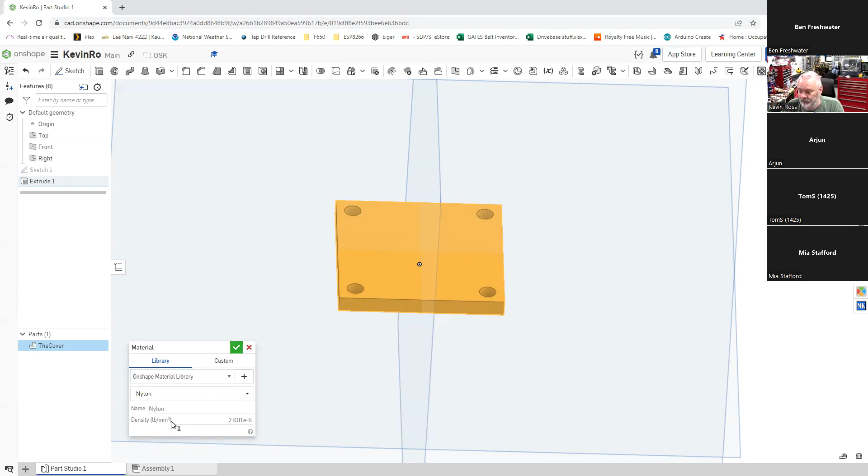What that does is it assigns a material to your part, so you now know its mass, how much it weighs and stuff. So every time I create a part, I rename it to something that is good and identifiable. I define what material it's going to be made out of, okay? And I'll also oftentimes edit its appearance to assign it a visually somewhat accurate color. The nylon in my printer is mostly black, so I'm going to color this guy mostly black. So there we go.

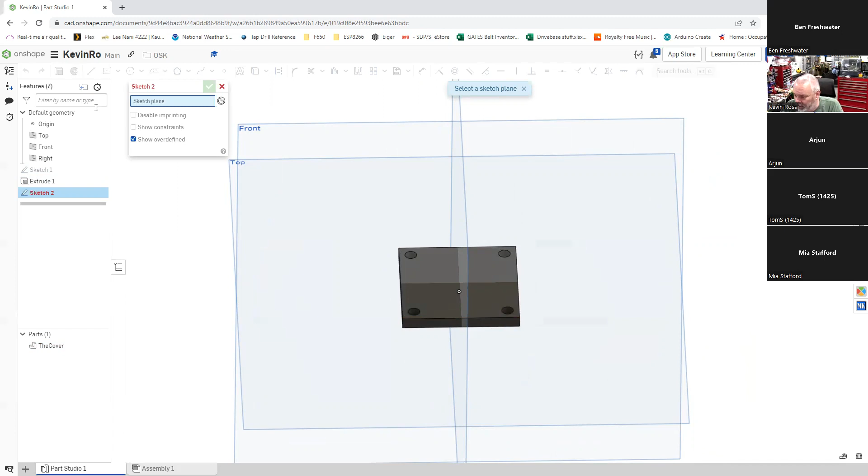So I'm going to do a new sketch. You can do this too, new sketch. And you're going to actually click on the top face of this part. See how it highlighted there? I'm going to click this, and you can see the sketch plane is the face of extrude 1, and that's where I wanted it.

Yay. And now I'm going to look at it from the top again. So I'm drawing, this is a new sketch, and we're just going to draw a circle. I'm going to put a center point circle, use that center point here, and we're going to drag something out and make it 20 millimeters. 20 millimeter circle right in the middle. And when I've done that, I'm going to hit the green check mark.

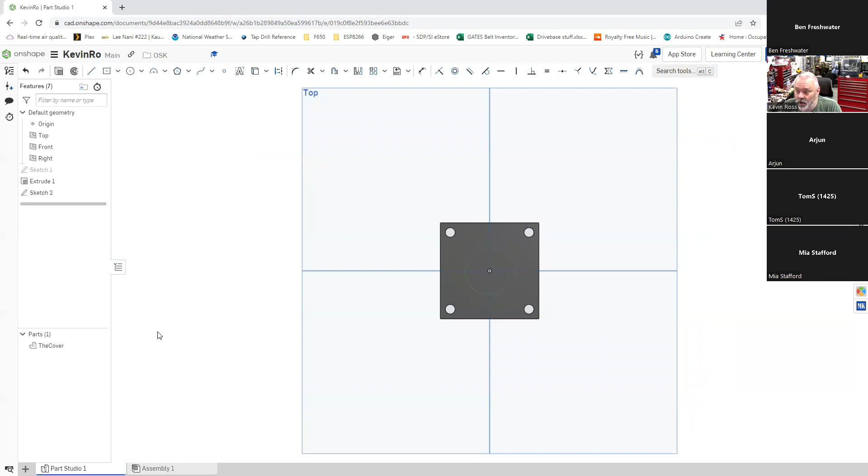And I now have another sketch, and I can do another extrusion. Okay, and I'm rotating this thing a little bit so you can see this. And it's asking me for the extrusion thing. So there we go, I just made a 25 millimeter tall hump on the top of that.

Now you can see there's add. I can make a new part, by the way. I could add, which is the default, or I can even remove. And if I hit remove, you'll see it, instead of making an extrusion, it made a hole, right? So that's how I cut a hole in this thing.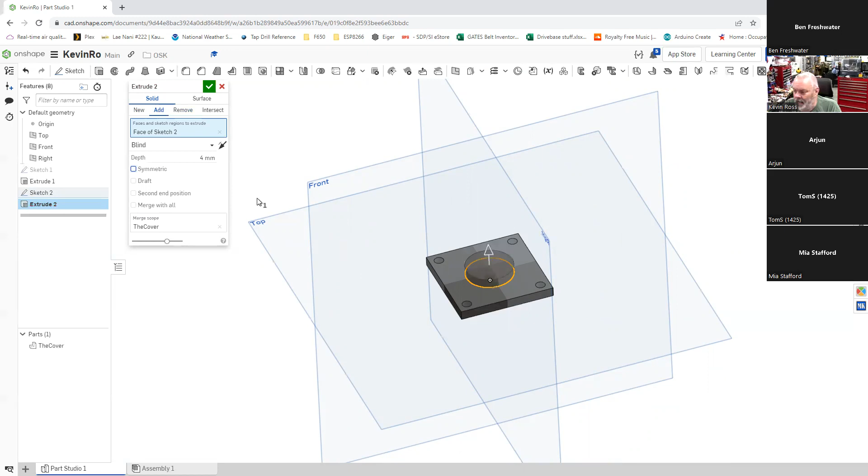So that's pretty cool. So actually, I'm going to switch it back to add, and we're just going to add a 4 millimeter deep bump to the top so that we know what's the top and the bottom. Okay, so yours should end up looking like this now. We good?

All right, yay us, we have made a part. Now the cool thing is that we can actually use this part. So now we're going to go back to assembly, and I'm going to zoom out just a little bit.

We're going to do an insert, and we're going to go to current document. You can see that we now have stuff in our part studio in the current document. And you can see why I named that the cover, because otherwise it would have been called part 1. If you fail to name things, you'll end up with lots and lots of part 1s, and you're not sure exactly what that means. So always try and give it a nice descriptive name.

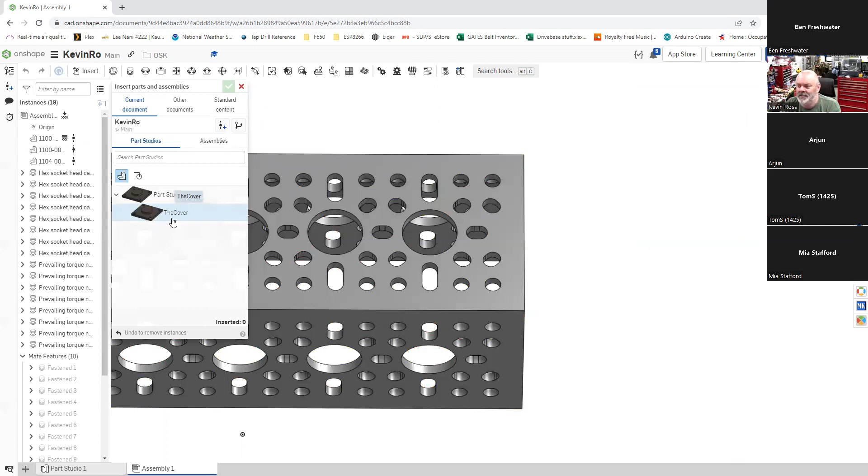Now I can insert this guy like this, bang. Okay, so I clicked there, left clicked there, and it's now inserted. Try that, and then when you're done, hit the green check mark.

And I am now going to mount it to the end of this. So I'm going to do a fastened mate, and I'm going to select this end hole here, just like that. That mate connector. And I kind of roll this guy over.

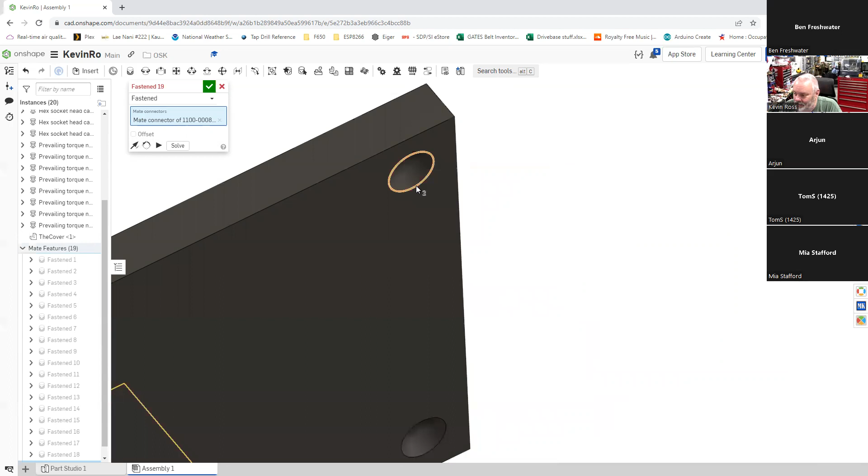Again, you use that right mouse button a lot. And I'm going to go select this hole. Okay, and it looks like it disappeared, but if I scroll out, I can see it sitting up there. And I'm going to hit the green check mark. And there it is, it is attached.

Cool beans. So we just made a part and attached it to our thing. We used a fasten mate, so it's not going to move around on us.

It isn't as big as I was expecting it to be. So a lot of times that's a real common mistake, is that you missed a measurement or something. So what I'm going to do now is I'm going to say, oh well, I'd kind of like it to actually fill up the whole part. So I'm going to come down here.

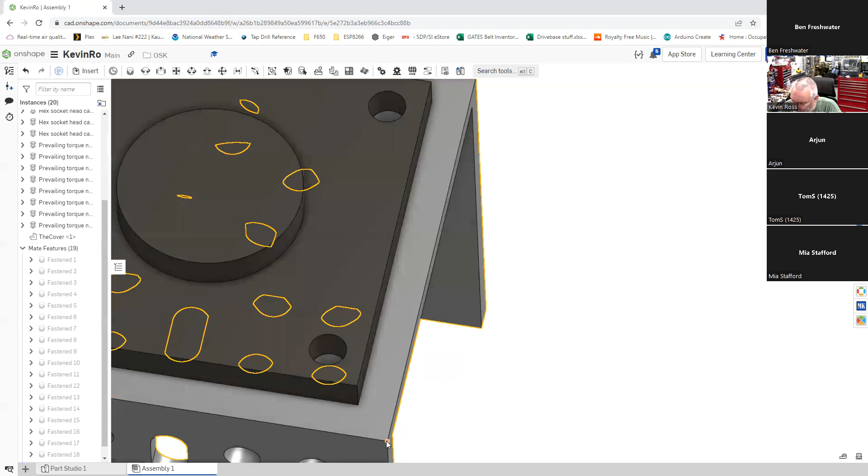I'm going to hover down to this corner, to that corner. I'm going to click that once. And I'm going to come over to the other corner and click that once. And I can look over here and see that it's 48 millimeters. Okay, so I think we made these 40 millimeters.

So we kind of screwed that up on purpose, because I just wanted to show you that I can now go back to Part Studio. So click on Part Studio again, and I can change the base size of this by going to sketch number 1, and I'm going to double click sketch number 1.

And I'm going to change the 40s down here to be 48s. Okay, and over here to make them 48s. And the beauty of doing all that symmetry stuff is I don't have to mess around with any of the other dimensions, right? Because we know we have a 32 millimeter bolt pattern stuff, okay?

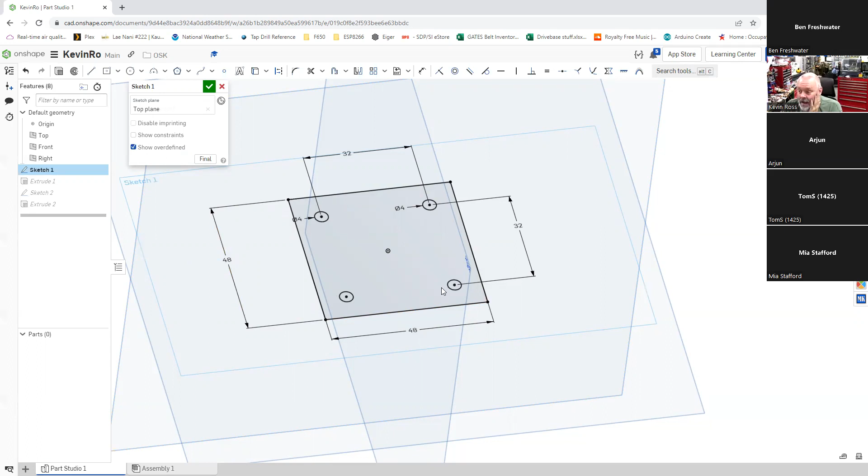And now if I come up here and hit the green check mark, this part got bigger, but I didn't have to change too much. And actually, if you click on assembly 1 now, you'll see that that part is now the correct size, full size, right? Sound good? So there you go.

We just gave you a little sense of how the program sort of works. When they're talking about part studios, you sort of get the idea that you can make a part in there and then go insert it in an assembly somewhere.

We showed some standard content, and we showed finding things in library files, because you'll end up using library files a lot when you're on a team. My team usually has a shared library where we put all the common stuff - motors, wheels, stuff that we've already downloaded. It just makes it easier.

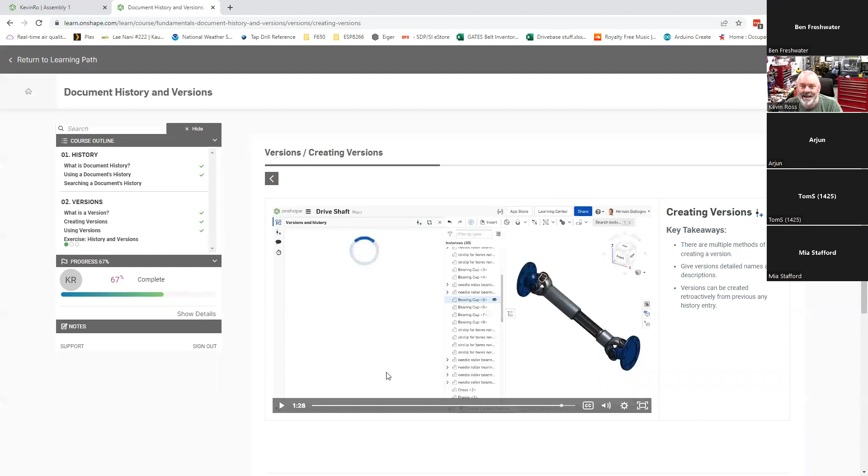None of these take a terribly long time. I think the longest one I did might have been a half hour, and it was really useful. So, okay, everybody good? Any questions about this, about where to find it? It's in the Learning Center, self-paced learning, learning pathways, educator resources—that's where you find the first one, or the robotics one. Questions?

Last thing I want to show you real quick is I did not draw these parts—I downloaded them. And so we're all going to go and download our first part. Very exciting. So what I'm going to have you do is bring up another browser window.

Let's just go to goBILDA.com. Okay, so this is the goBILDA site. AndyMark, REV Robotics, goBILDA, Actobotics, and ServoCity—they all have downloadable CAD files. So if you end up using one of their parts, you can download the CAD file.

For example, let's go grab a piece of structure. So I've gone to goBILDA, and I clicked on the structure.

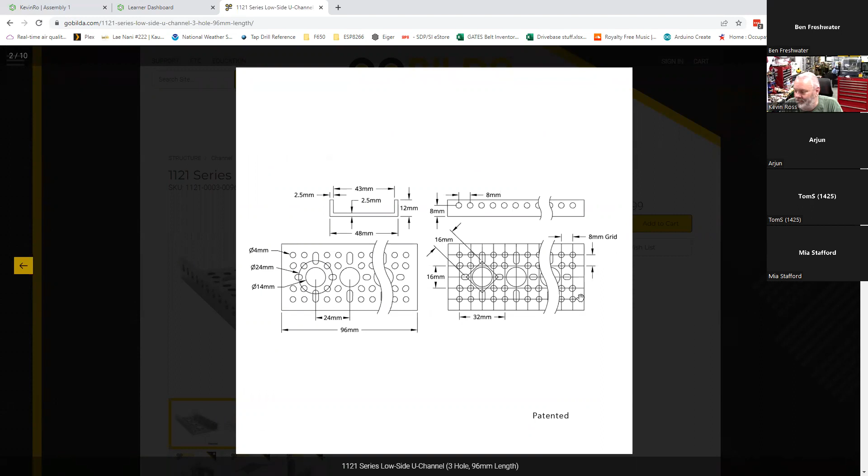The holes are actually, looks like these holes are 16 millimeters apart, right? Yeah, whatever. So the other thing you can find if you scroll down a little while is downloads. And the thing you download for CAD is called a step file, sometimes abbreviated STP.

Again, REV Robotics, AndyMark, all of these folks - if you find something you're going to use, you normally can find one of these. So I'm going to click on this, and it is going to download a step file. And it did it.

Okay, well it did it, and it ended up opening up over on another window. I apologize about that. So it downloaded this step file and automatically opened it for me, and this is the file that I want.

At goBILDA, they come down in zip files, so sometimes you have to extract them. So I'm extracting that file. There we go, so there's the extracted file. Okay, so I know that I have this in my downloads directory.

Okay, so then what you do is you go back to your file here, and you could go down to the plus thing, and you can actually import something. It brings up whatever directory you last used - I usually use the quick access and find downloads. And here is that file, here's that folder, and there's that step file that we downloaded.

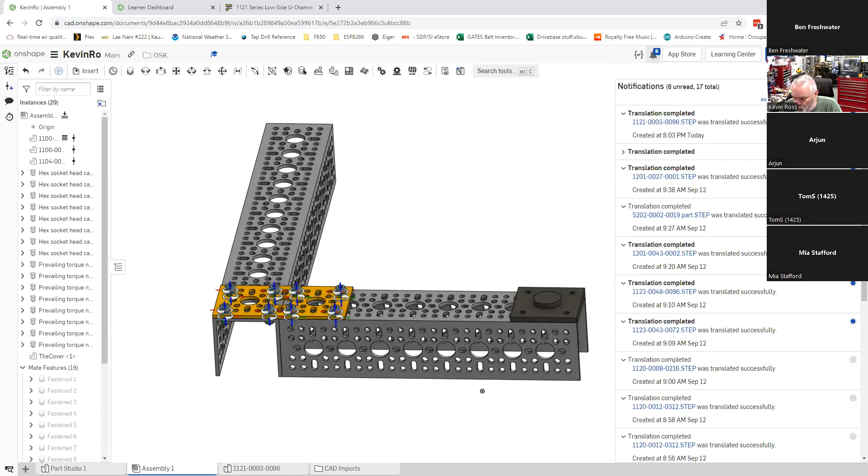Okay, so then I'll hit OK. And you can see it has uploaded from my computer up to there, and it'll translate it. If you have a really complicated part, it might take a minute or two to translate. But when you're done, you can look down here and see that a new part studio has been created. And if I click on it, you will find that part - and so there it is.

Usually the first thing I do when I import something is, if I'm okay with the name since it's using its part number, I'm not too bad with that. But I will go in here and assign material, because it doesn't come with the material assigned. So I'll usually use 6061, a very common form of aluminum - it's probably close enough if you don't know the exact alloy. So I'm going to call that aluminum.

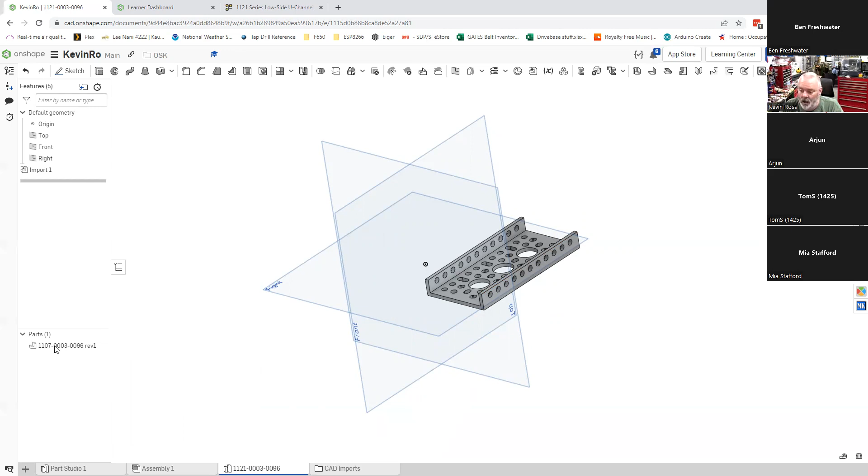What that'll do is set the material's weight and center of gravity. So if you just automatically do this when you're downloading a part, you figure out what it's made of and how much it weighs - that's a good thing. Then I'll also come in here and edit appearance. I usually pick this silver color, and it's A5, A5, A5 is this number down here. I usually use that for aluminum.

So now I've got that part, and I can go do an insert, and look, that part is now here, and I can insert it right there. You can get wheels, you can get motors, you can get structural parts - that's how easy it is to bring in a part from one of the vendors. And that's how we did the assembly of that robot I showed you at the beginning. Just for completeness, Andy Mark.

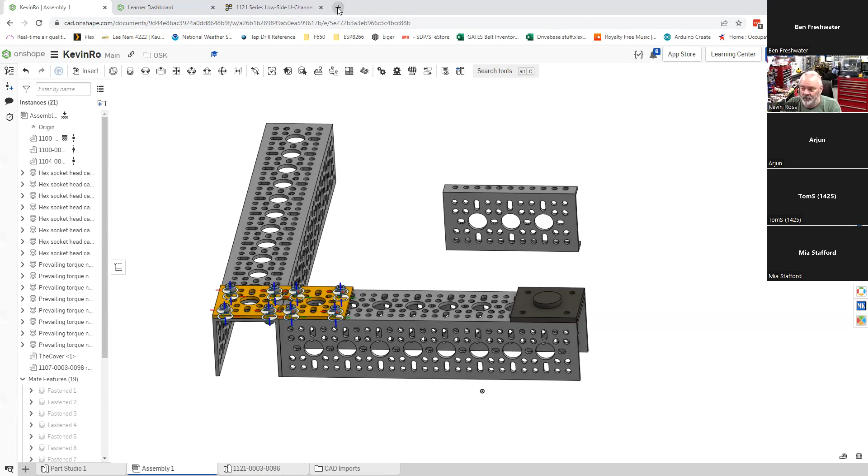So if you were to pick, say, an Andy Mark part, let's go with a NeveRest motor. So here's the classic NeveRest motor. And if I go down here at Andy Mark, you can find CAD documents, and there it is. There's that step file again. You can also get a layout. goBILDA doesn't really publish theirs, but Andy Mark does, and they've got a full drawing. So if you need to figure out what the bolt patterns and stuff are, so that when you're drawing your own holes, you can find all the dimensions there.

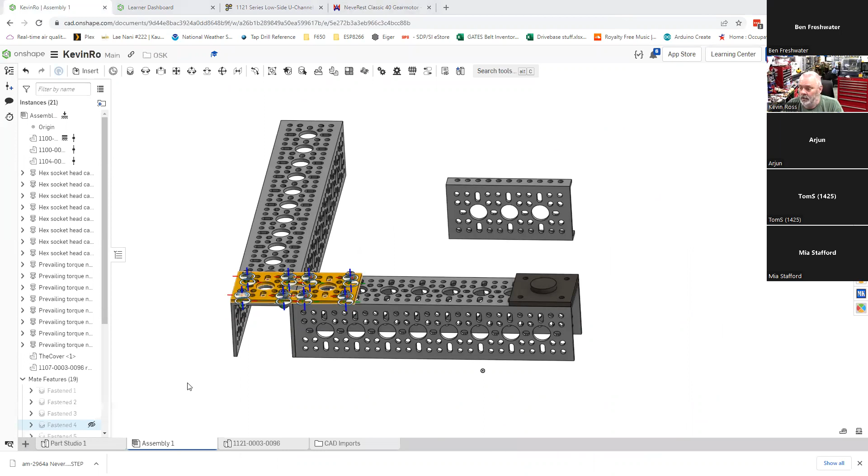Super common at all of our normal vendors. And you can download the step file. So I'm going to download this guy and do one more upload here. I'm going to do an insert or import, and I need that. So we'll import this, and again, I'm going to do a combine into a single part studio and create a composite. There we go, and that'll import. Depending on how busy Onshape is, the translation may take a minute or so. Hey, it's done. Cool. So now you can see down here, I have a NeveRest classic motor.

So there's a motor, right? And so you can go and collect up the stuff that you're planning to use on your team's robot, and use them in your models. And you don't have to sit down and intricately draw stuff out. Okay, cool.

Who's got questions?

I invite you to go and play around with the Learning Center. Some of the tutorials are really awesome. You'll find in another one, they actually build a skateboard. The skateboard one's actually really cool. You get in there and do all sorts of really crazy things. But learning how to assemble things and learning how to draw and dimension and use the basics of the program are really, really cool.